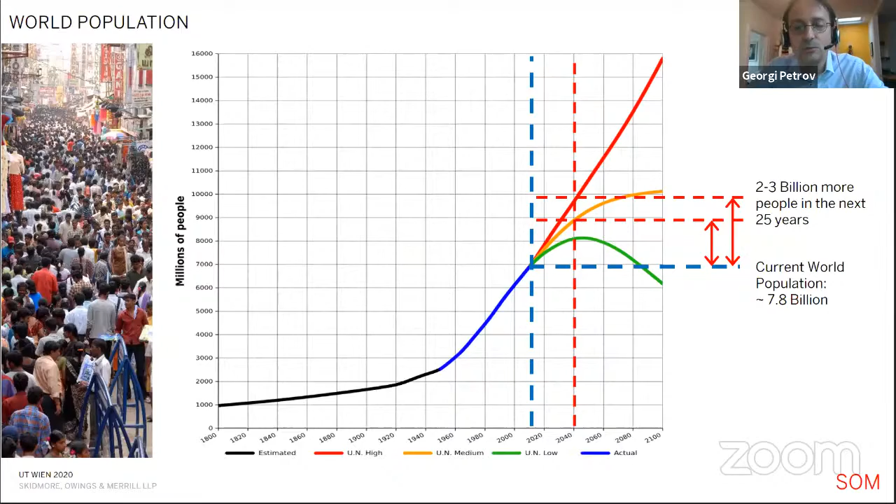And the trend is that a lot of us are living in cities. We passed quite a while ago the point where 50% of the population of the Earth lives in cities. And in the next 25 years, the estimates are that almost 3/4 of us will live in cities. And at SOM, we approach this challenge through the combination of architecture and engineering.

Even at the very beginning, our firm was founded in 1936. These are the three dudes, Skidmore, Owings, and Merrill. They're all dead now, but Merrill was a structural engineer. So this collaboration between architects and engineers is in the very essence of our practice.

And even to this day, we always go out together and design as architects and engineers together. It's not like our architects doodle something goofy and then give it to the engineers and say figure it out. Especially on challenging projects like tall buildings, we always come up with ideas together at the very beginning.

We have a number of offices. The major ones are in New York, Chicago, and San Francisco, but we have a pretty big office in London as well, and then several other cities around the world. And we do a lot of various projects, commercial renovations, but we're mostly known for our super tall towers.

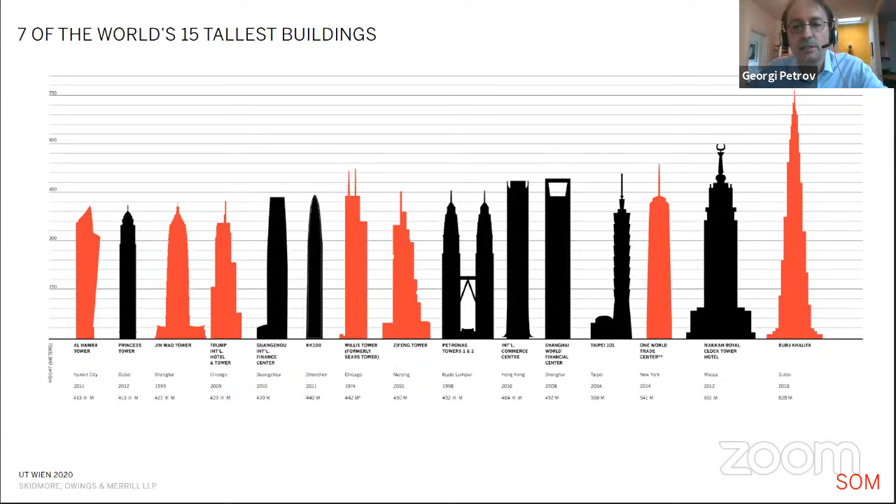And we have done the very first example of each one of them. So not only do we design tall buildings, but we design very innovative and pioneering tall buildings. And I'll show almost all of these to you throughout the lecture.

And the other theme that repeats through all the projects is this multidisciplinary approach, but it evolves through technology. And we're not married to any one type of design tool, and we keep looking through the newest. And we've been pioneers also in digital design, going all the way back to the 60s.

In the 80s, in fact, partnering with IBM, we developed the first sort of BIM software. Unfortunately, it was Unix based, so it didn't quite survive. It got beaten by AutoCAD in the early 90s. But as new tools come up, we always adapt and change the uses.

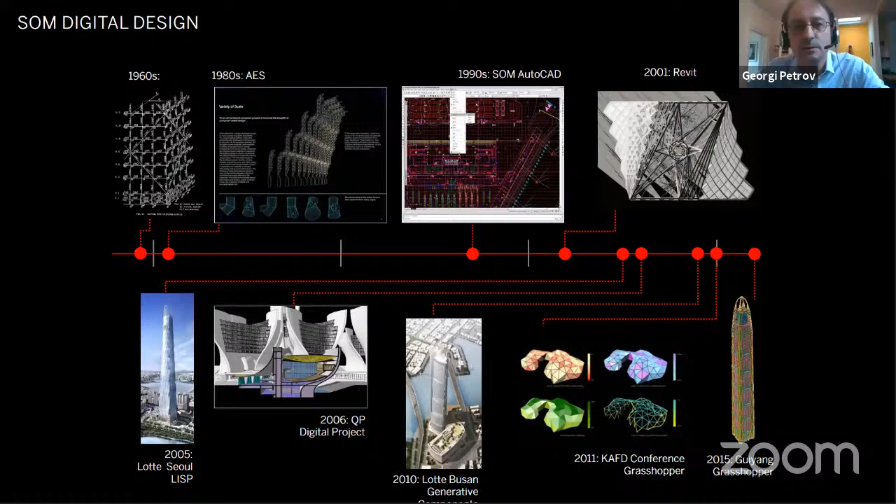The last decade has been largely dominated by Grasshopper and Rhino as the main tool where we come up with ideas and model geometry. And very often we find that the commercial tool doesn't exist, so we also write a lot of our own code. So these are a lot of these internal form finding and parametric modeling tools that we have.

And the type of thought process is always that you start with some kind of blank slate, a domain where you want to create geometry. And first we come up with what is the correct topology, how things are connected, both architecturally and structurally. Then we optimize the shape, and only at the end do we size the individual members.

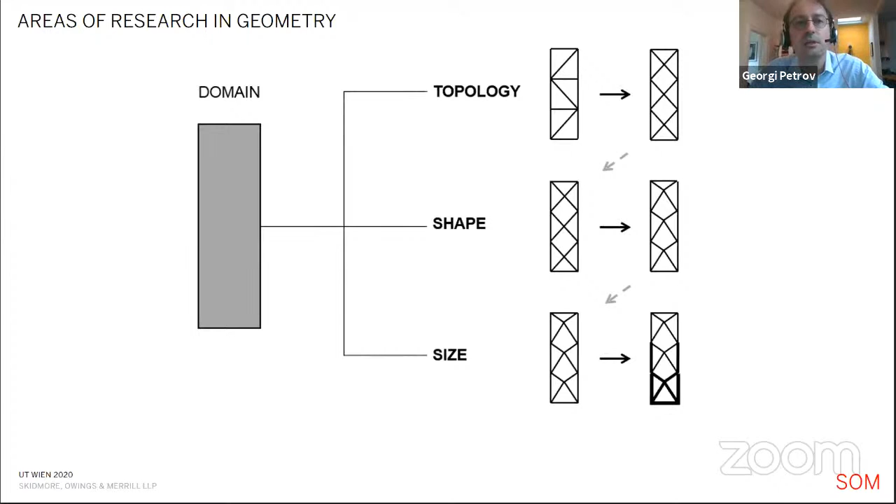So instead of just drawing some random blob that Rhino allows you to do, and then trying to shove some structure on it, our process is more thorough and more step-by-step, making sure that we have the correct geometry first before trying to make it work, both architecturally and structurally.

And then, of course, when you build tall buildings, you need to work with a developer, and they are looking for very specific things. There's a lot of competition for office buildings and for residential buildings. They're looking for the tallest, the grandest, the best spatial experience. Everybody wants big column-free interiors. And in today's world, everybody wants it built immediately. So these are the pressures from the developer and from the constructor side.

And then in the last 20 years, computer technology and digital design have allowed us to draw any sort of shape. And very often the question is, what is the correct shape? Just because you can draw something goofy and blobby on the screen, is that really what you should build? Is that the correct shape? And is that the best thing for the project and for the planet?

And so in engineering super talls, this is a little analogy. I don't know if you've heard of this Hambly's paradox. Basically, if you have 2 stools, one with 3 legs and one with 4 legs, which is more structurally efficient, which will have less material? And how do you design the legs?

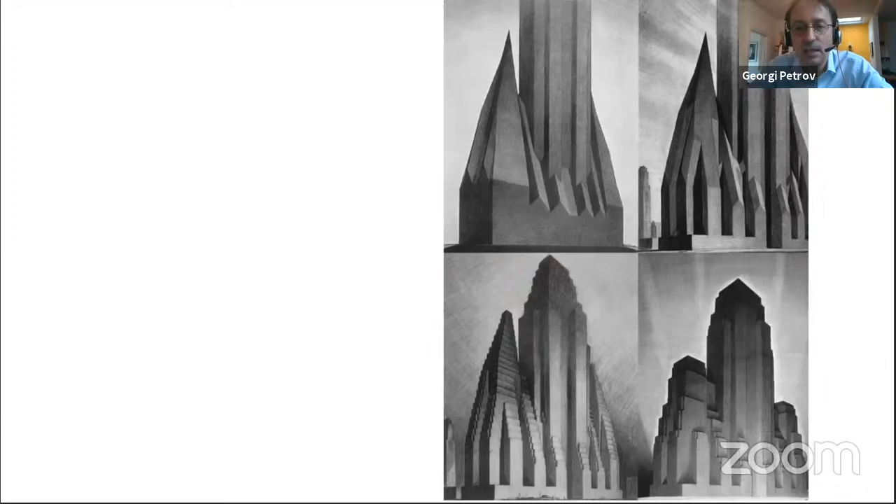The next big influence is this building by Mies van der Rohe, the Seagram Building. What they did with the company is they decided to just take the 25% and build straight up, and leave the rest of the lot unbuilt. So this is a private plaza in front that's open to the street, and the city really liked that. And so they changed the rules to actually encourage people to build this. So if somebody wanted to build another building and leave a plaza like this, they would be able to build a bigger building on this lot.

And so in the 60s and 70s, New York started getting a lot of these boxy glass towers, like the original Trade Center and so on. And that's, again, a reflection of the zoning. And nowadays there's almost no land left to build. And so we're starting to get these really thin towers, especially down south of Central Park.

That is, again, a change in the rules of how much you could buy the air rights of your neighbors and build these really skinny, super tall towers. The other effect on tall buildings is program. What is the building made out of?

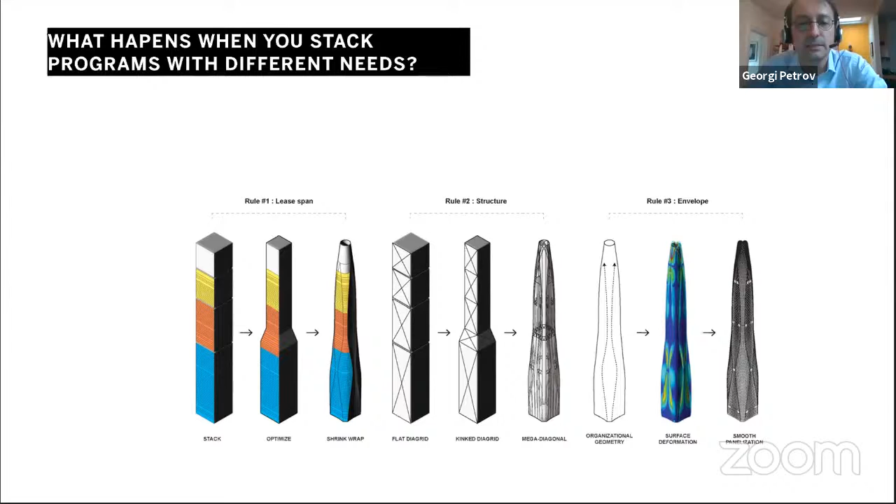Another one is conveying. You got to get the people up and down the building and all the water and all the mechanical systems. And here, up to 40 stories, everything is quite conventional. When you get taller and taller, above 60 stories, you really have to rethink all of these systems, the elevatoring, the water supply and the air supply.

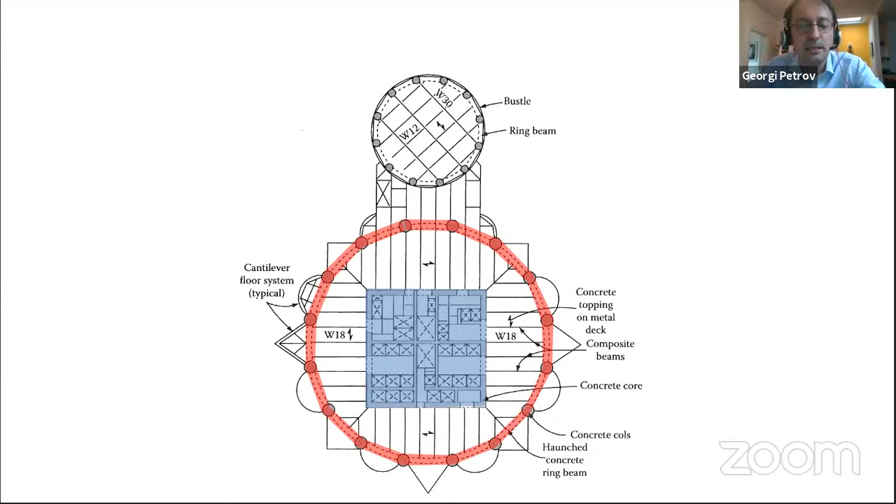And so in a super tall building, this core in the middle becomes a big 3D puzzle. It's pretty challenging; that's one of the biggest challenges in designing tall buildings. So you have to put all these things in with sometimes competing pressures. So all the structure goes in, and then usually it's a big puzzle to get the elevators right. They drive a lot of the design of a tall building.

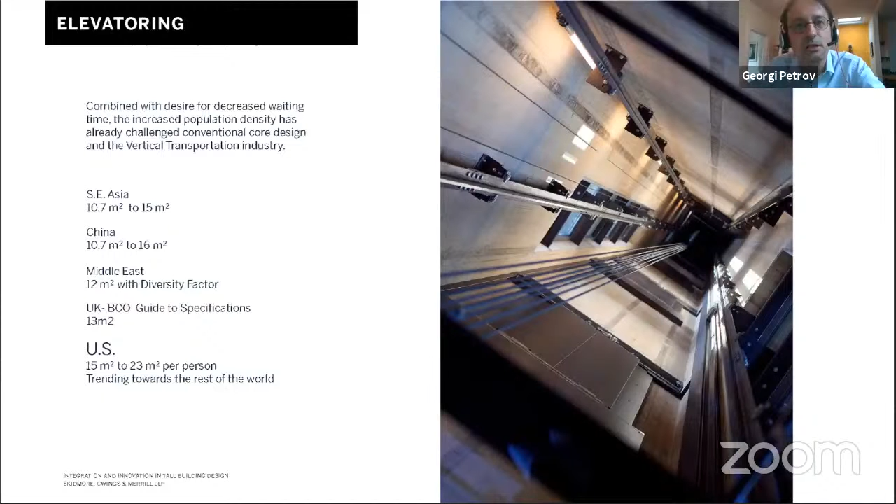And in a very tall building, you usually have different zones. So when you come in, you usually have sort of an express elevator to a sky lobby, and then you switch to sort of locals. And the cool thing of this is that you could stack the local elevators on top of each other in the same vertical space. You have to have a few stories in between for the pits and the machine rooms, but that saves a lot of space.

And so you can think of a very tall building as sort of a neighborhood. You have the subway, the tram gets you to your local stop, and then you have to kind of walk or bike the rest of it to your destination. And then usually there's some firemen's lifts, and typically people put like restaurants and observation decks at the top. So there's some express ones.

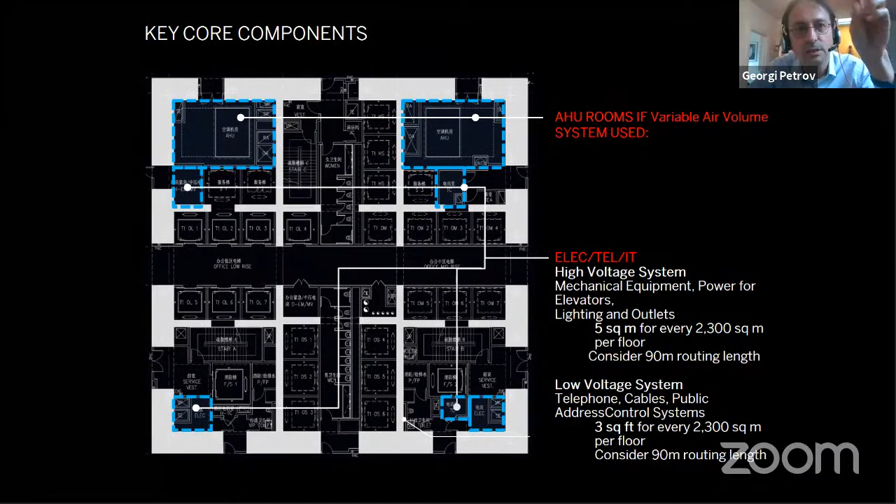And so in a typical one, you'd have the express, the shuttle elevators, and then you would have the locals. And then usually on every floor, you need some air handling units, depending on the type of systems you use. You usually need some electrical and IT closets, and they all have requirements of how far apart they have to be and where their shafts are. There's usually some plumbing rooms and plumbing chases.

And then depending on the code and which country you're in, you have 2 to 3 emergency fire stairs, and usually 1 or 2 fire lifts that only the firemen use in an emergency. And so in each floor, all this stuff needs to make it out of the core. So if you ever work as an architect or a structural engineer on a tall building, it's really a big challenge trying to work this in 3 dimensions.

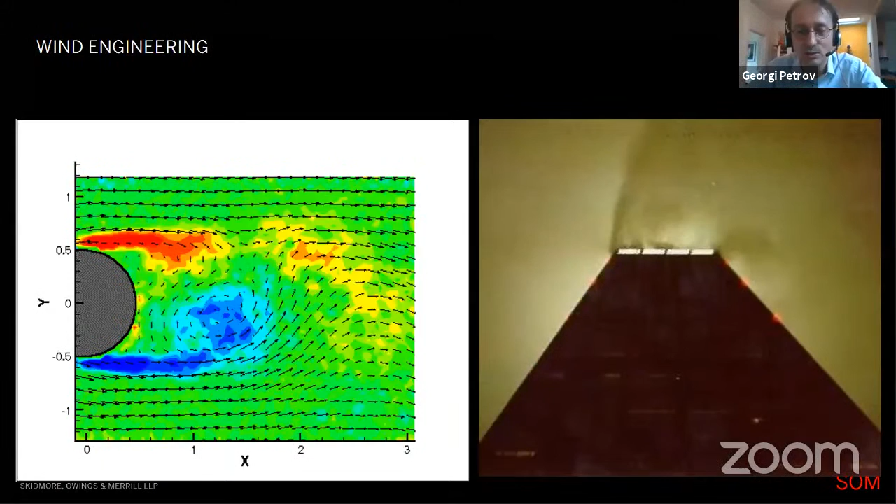When wind or water goes past the stationary object, it starts to flow on either side of it in alternating eddies. So we call this vortex shedding. It sheds these vortices on either side of it. And it actually happens. This is the John Hancock with the cloud going behind it. And so the interesting thing is that as these vortices happen, they start shaking the building in a rhythm.

And if the rhythm in which these vortices shed matches the fundamental vibration period of the building, then you have big trouble, just like a kid on a swing, right? You give a little push at the right time, and then you could really amplify it. And the thing is that a very tall building, as these vortices shed on either side of it, the building actually shakes perpendicular to the wind. So as the wind is blowing, the building is actually shaking the other direction, and these vortices are shedding.

So, the worst thing you can have is a straight building. Can you see the animation here? Is it showing? Because it doesn't usually work very well on Zoom. But anyway, if you just have a straight building up and down, this is a little desktop wind tunnel that one of my colleagues built in their house to demonstrate this.

But anything you can do along the height of the building, so that at different heights the vortices shed in a different period, actually helps a lot. We call it confusing the wind. You don't want to give the wind a chance to get organized and these vortices to shed the whole length of your building. So if you add some notches, that helps a lot.

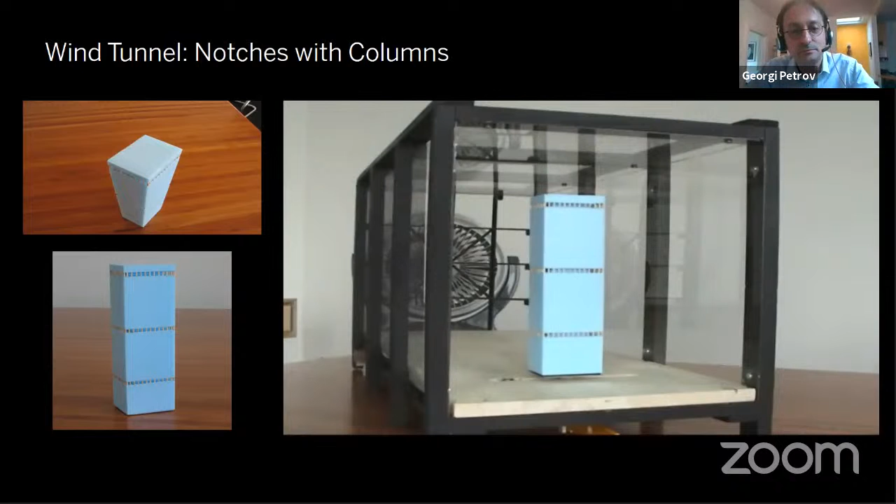You can also chamfer the corners. That helps a little bit less. You can do square cut the corners. And the one thing that helps a lot is actually shaping the building. So giving a taper or some kind of a lean to the building helps tremendously. Oops, did this crash? No, okay, anyway. You should be seeing all of them shaking, but I'm not sure it's working. Oh, no, this one. So here's all of them compared.

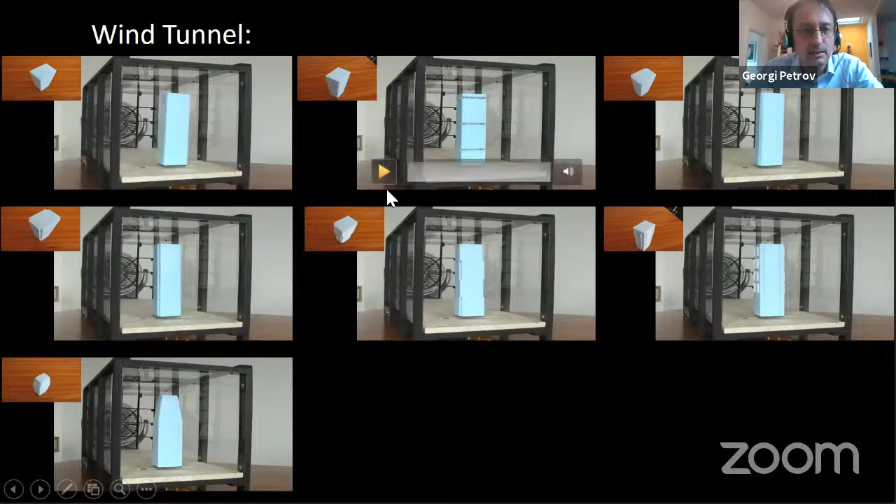Anyway, so the main force in a tall building is actually wind. The gravity doesn't really control very much other than typical floors. And you can think of a tall building as sort of a cantilever beam. So you have a typical cantilever beam that you have a force on. A tall building is basically everything rotated 90 degrees. So it's a really tall cantilever sticking out of the ground.

And in almost all places in the world, the wind forces are more important than the seismic forces. There's very few places, like Mexico City and Indonesia and sometimes Tokyo, where seismic forces govern. But you can really think of a tall building as governed by wind. Definitely almost anywhere in Europe, wind would be the governing force on it.

And so if you think of a tall building as a cantilever sticking out of the ground, you can just think of it as a big beam, right? We have a beam, we have flanges and a web, and the flanges are the ones that support the bending, and the web is what supports the shear. And so your goal is to put the material to support your tall building as far away from the center, just like you would do on a beam.

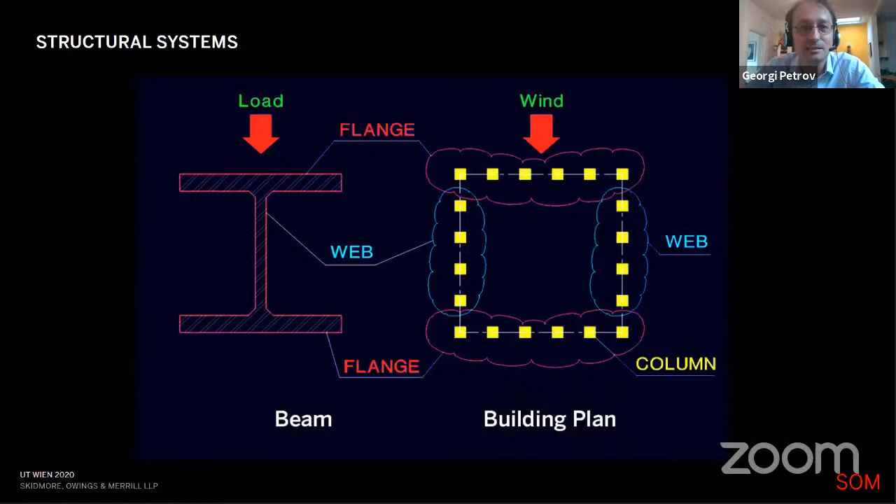Or think of it another way. If you're just standing straight with your feet together and somebody pushes you, right? First thing you want to do is spread your feet apart to get a wider stance. So it's the same thing for a tall building.

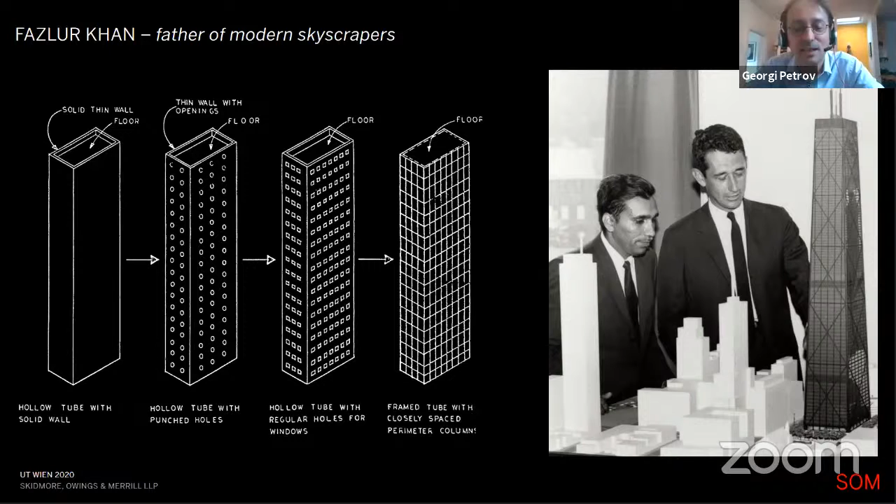So if you think of a tall building as a beam sticking out of the ground, you really want to put all the materials on the perimeter, basically make a big hollow tube. Obviously, that's not a very good building. It's a chimney. So the question is, how do you shape the facade to make it nice and put all of the structural material to the perimeter?

He was actually on the Google Doodle a couple of years ago for his birthday. So we made it there.

But here are three of the very earliest skyscrapers. If you noticed, all of the buildings around them when they were constructed are these 20s and 30s Gothic-looking skyscrapers. And here, everything that you see on the facade is a structural element. So every vertical is a column and every horizontal is a beam. So this is this idea of putting all of the structural stuff on the perimeter.

And then if you look at the floor plans, this is a residential building and the other two are offices. There are no columns in the middle. There's still some gravity columns holding the elevators and stuff like that. But really all of the lateral system, all of the material resisting the wind loads, is on the perimeter. And that really frees the plan on the inside to be free of columns.

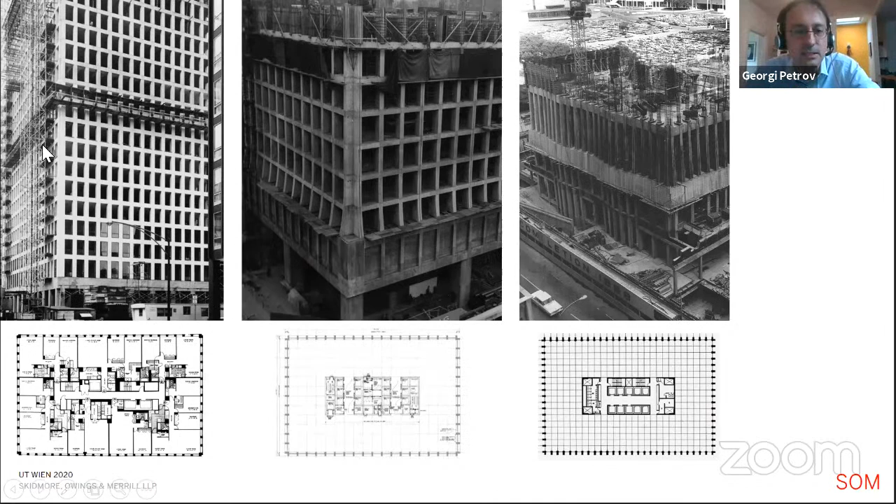So this is something that's very common these days. That's what you would expect, but these are the first buildings to be able to be really tall and do this. And again, what you see on the facade, the structure is the architecture. And this sort of culminated in the John Hancock Center in Chicago. And disclaimer, this is my favorite SOM building.

Here, instead of putting all of the columns closely spaced like this, if you do the big X's, you could have the columns spaced far apart. And this kind of combines all of these themes that I've introduced to you together for the first time. So the developer came with this idea to do two buildings. One is an office building that's kind of wide, to make the office work, and then a residential building that's kind of narrow, taking up a big chunk of the ground.

And so what SOM proposed is, why don't we take the two and stack them on top of each other. The building can taper in so that the office at the bottom has the wider lease span. And actually at the very bottom, it has parking, and cars don't give a damn how far they are from a window. So the widest part is actually parking, then the office, and then the residential on top, and then there's an observation deck and a bar at the top.

So if you ever go to Chicago and you want to go to the top of the building, there is the observation deck where you pay for tourists. Or you could go to the bar, that's one story above it, get a drink and get the same view. So just some travel tips for you guys if you ever visit Chicago.

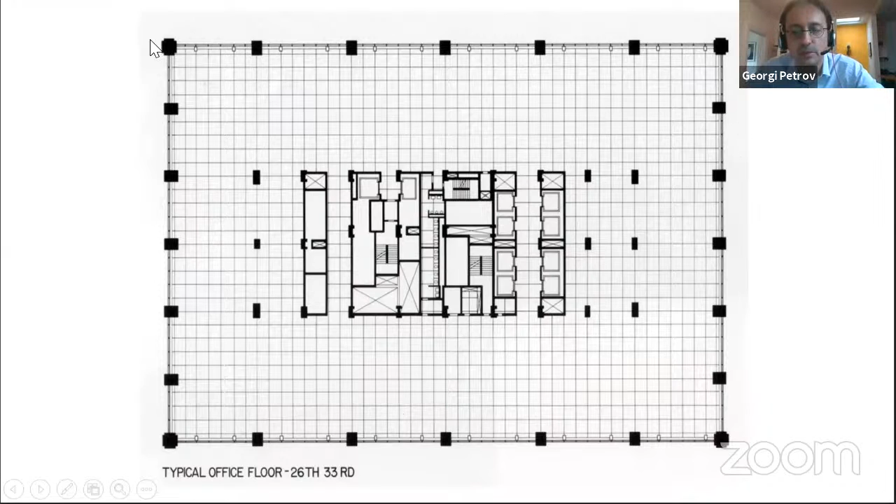Anyway, so this is the ultimate sort of marriage of the structure and the architecture. All of the lateral system is the perimeter. This is how it looks in plan. So the taper is over one of the modules. The rest of the columns are straight. And then this is the floor plan. The columns here in the middle are just to hold the floor to reduce the span, and all of the lateral system is on the perimeter. And then there's a pool and residential parts. This is it going up.

And another key thing, again a theme that repeats a lot, is what you do at the connections. So we can come up with all these optimized geometries to reduce the size of the elements. But in order to gain all of the savings and all of the economy, you have to really think about how things fit together. And very often it's the connections that really govern a lot of the sizing, so we think a lot about how things fit together. For example, here, the diagonals are actually rotated 90 degrees from what you would expect in order to make the connection as small as possible and to gather these savings.

And when we first proposed this as a very efficient structural system, there was a big sort of trepidation or uncertainty about the diagonals, like who would want an apartment with the diagonal going through it. And in fact, if you look these days, the apartments with the diagonal sell for more than the apartments without it. So it was really embraced by everybody, and it's a big success.

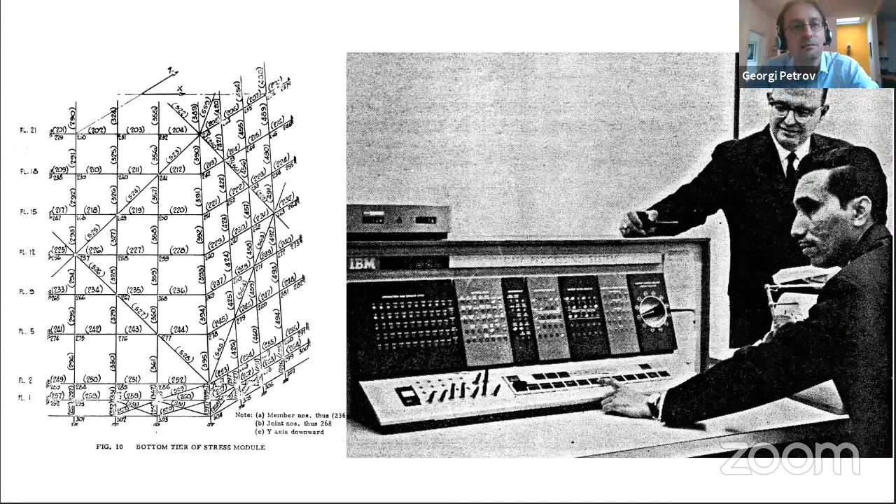Another thing is this is the first building that was analyzed by computer. Here's Fazlur Khan with the IBM computer in the 1960s. There weren't any computers in the office, so they did a partnership with the University of Chicago to use their computer. And the computing power was so small that they couldn't model the whole building, so they had to model only a quarter of it and use the end conditions to simulate the full behavior of the full building. So we've kind of been trying to introduce computational design from the very, very beginning. And here is the building as it stands today.

Another next step was in the 90s, and this is another really important building, the Jin Mao. It's the first super tall building outside of the United States. Besides the John Hancock, it's the first mixed-use tall building. And it really changed a lot of the building codes in China; in this giant construction boom in China, a lot of the codes and the construction methods were first developed on this tower. This is, again, a mixed use. It's got an office and a hotel on top of it, with an observation deck at the very top.

And here, again, it's a new theme on this idea. Instead of having a bunch of close columns on the perimeter, they put all of the lateral system in these 8 mega columns, so bunched it all together. Again, they're as far away as possible in order to make the building as stable as possible. And then there's the core on the inside. And on each corner, there's 2 small gravity columns that are just picking up the corner. They're not part of resisting the wind loads.

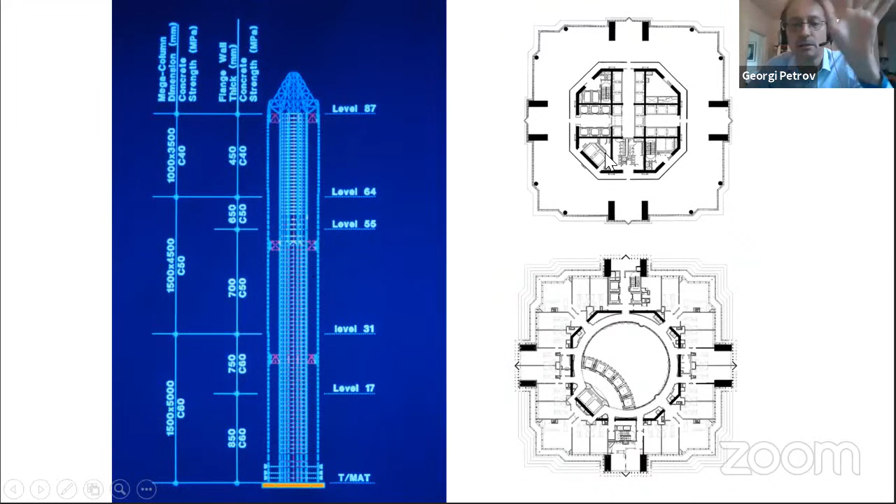And the cool thing is that as you go up at the top, you no longer need all the office elevators and a lot of the other stuff, so they actually hollowed out the middle for a pretty grand lobby inside. And when I was a student a long time ago, I got to visit it. So this is me hugging one of these mega columns. You can see the size of it down at the ground level in the lobby.

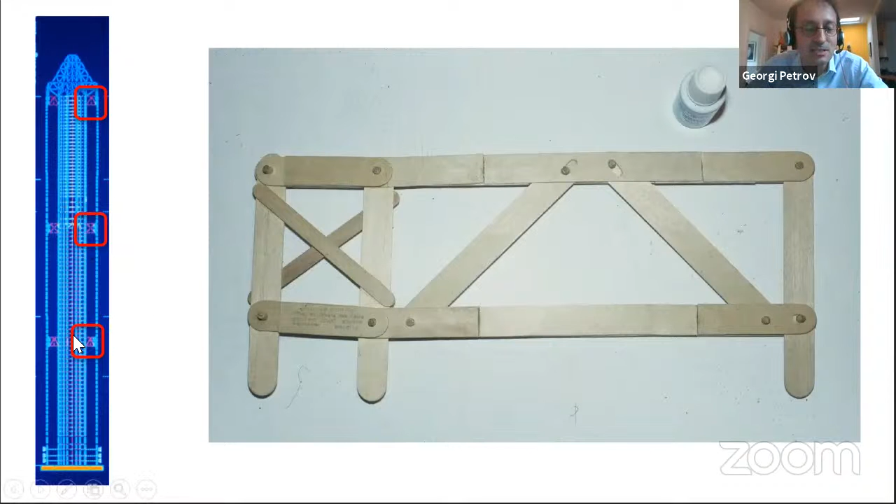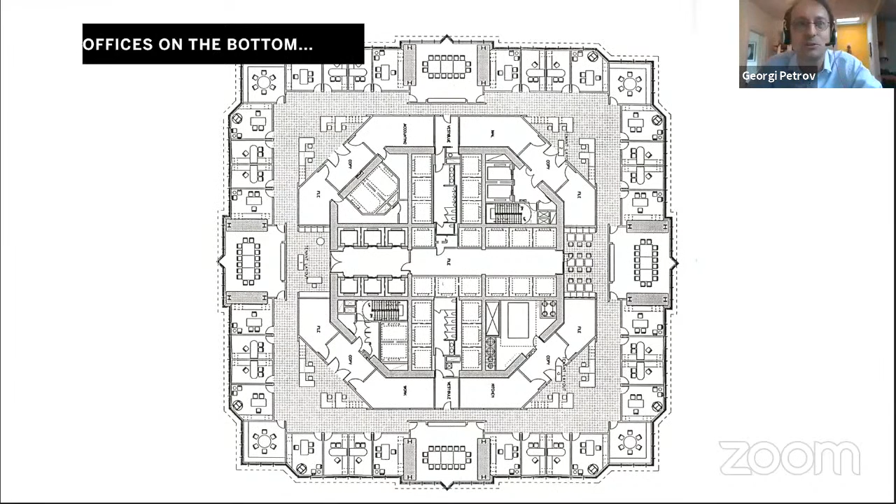I should ask, do you want to ask questions throughout or at the end, or I can keep talking? I'll keep talking.

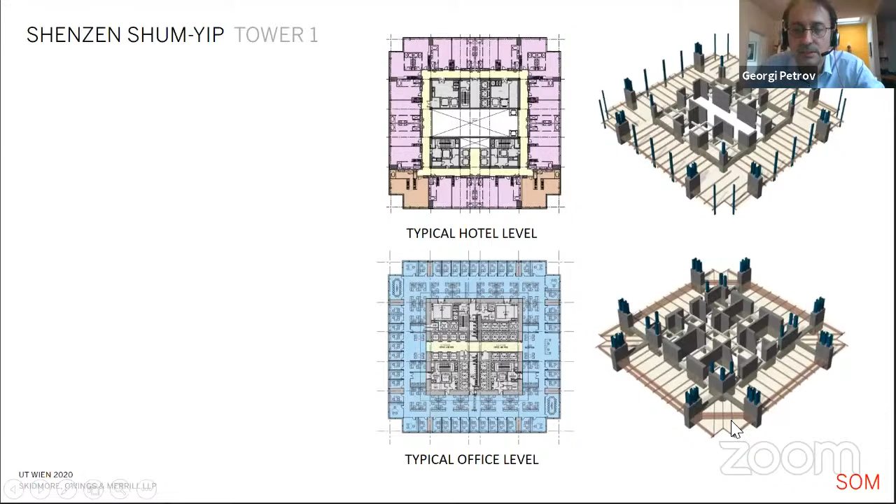And here, just like Jin Mao, we have 2 mega columns on each side and a big core, except that we wanted to have no other structural columns, to get rid of these corner ones, because there's a lot of good views around. So we wanted to minimize it to only the 2 mega columns. In a typical office building, you have a corridor if you have more than one tenant on a floor, and that makes the span between the facade and the core wall bigger. So we wanted to reduce this in order to reduce the load on the perimeter, minimize the structure and not have gravity columns. So we actually ran the common corridor through the core. That way you could have one tenant or 2 tenants or 4 tenants all on the same floor, so the client has flexibility in the future.

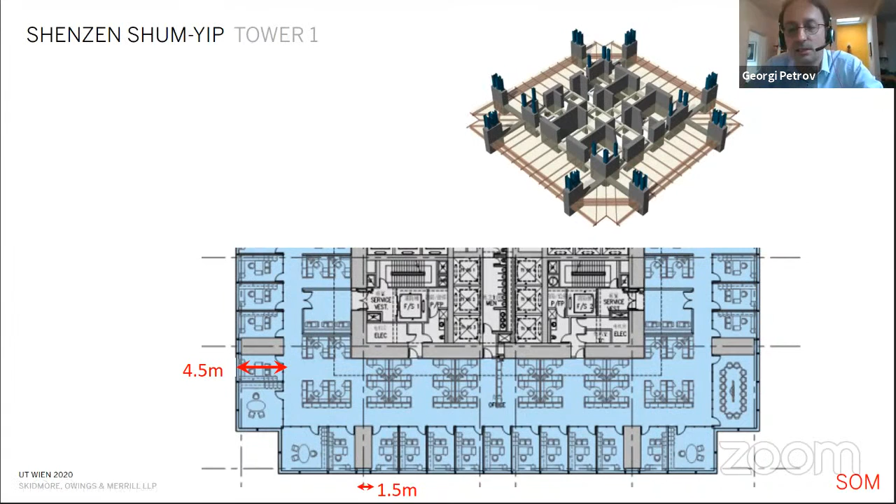And we actually sized the mega columns to be the depth of a typical office in China. In China, they do a lot of enclosed offices. In Europe and North America, we usually have more open office conditions. The typical facade mullion is 1.5 meters, so we made the column 1.5 meters. And the typical planning for an office is around 4.5 meters. The interior layouts usually work in 1.5 meter modules. So if you do fill out a floor with offices, as you're walking down this corridor, the columns will completely disappear. They'll be just in the wall of the offices. But if you do want to have an open space, then we want it to be as clear as possible.

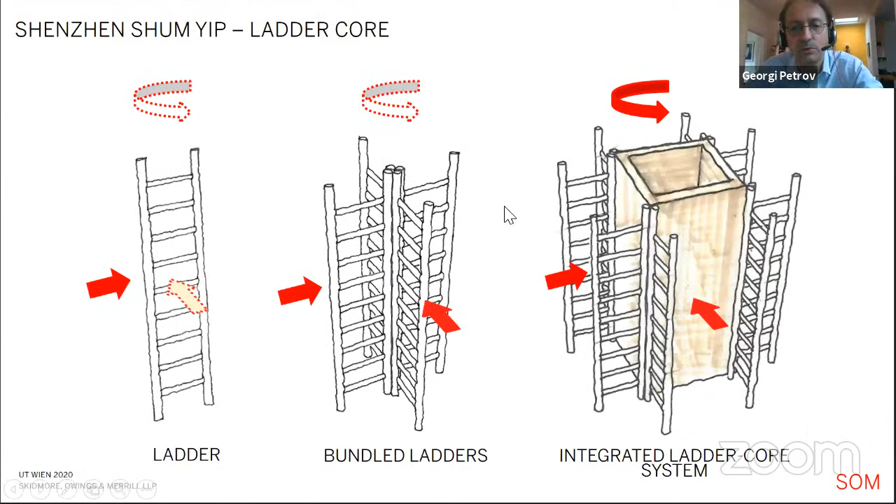And to emphasize this, for this building, we took the typical window facade module of 1.5 meters and doubled it. So we have extra wide facade modules, again, to maximize the views out. So this is the goal that we had architecturally. And the structural system we came up with is called a ladder core. If you take one ladder, it's soft in one direction and easy to twist, but really rigid in the other. If you put 4 ladders together, they're still soft to twist, but they're really rigid in 2 directions. And if you combine them with a tube core, then you have a pretty robust system that's rigid in all ways, in both translation and in torsion. So this is our structural system. Instead of having big outriggers and belt trusses, we have the core and the mega columns, and they're connected on every level.

There's still some belt trusses along the perimeter. And in order to get rid of the other gravity columns, we decided to put the columns in, lined up with the core, and then cantilever out the side. So this is what we call a balanced cantilever. The cantilever on either side helps keep the forces in the big central span free. So every floor has, I think, 26 meters from face to face that are completely clear of columns. So it's a pretty impressive span. This also helps control the gravity loads, so there's no uplift. The building is not trying to pull out of the ground.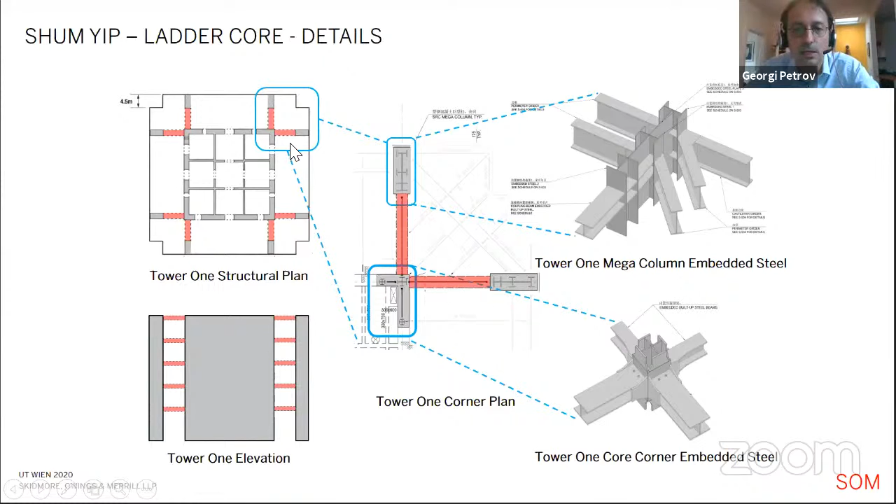And then structurally, the biggest challenge is these link beams, basically the steps in the ladder in the analogy, that connect the mega columns to the core. And so there's a lot of steel embedded in it. And this is because this is a brand new system that's never been done.

We modeled everything in 3D and actually built a finite element model where we modeled the steel, the rebar, and the concrete, and applied forces, and then made sure it performed well in each of the different earthquake and wind situations for the Chinese code. And so this is the structural system. There's the core, steel, mega columns. This is what the steel looks like inside the mega columns down at ground level.

I do have a question. Yep. So I understand that you have the freedom to use this 26 meters without a column. Yep. But do you also have an advantage to build higher? That's one question, and another one is, how's the comparison? How much material do you use in comparison to the earlier method? Ooh, that is a really good question.

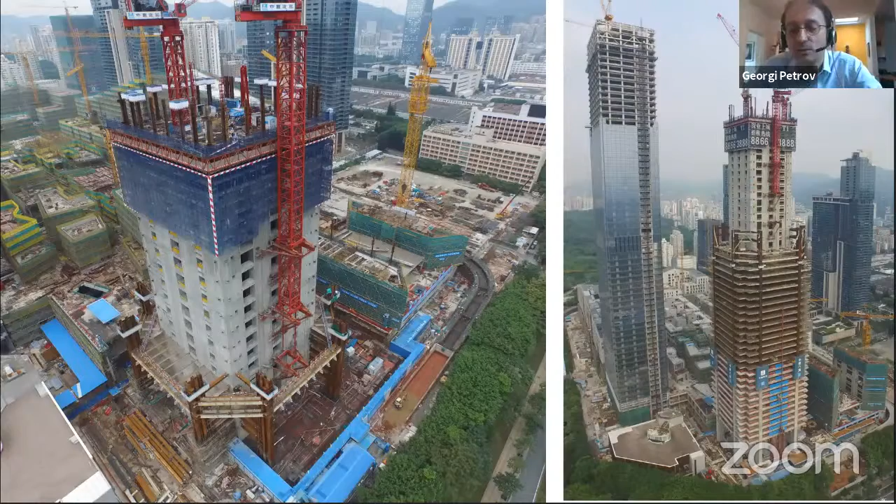So the first one is, if you notice, there's actually a double beam. So there's two of them in order to keep the depth as small as possible. And they are deeper than the small gravity beams that span to each floor. Actually, I think I have a picture. Oh, there you go. It's the very next slide. So this is it under construction.

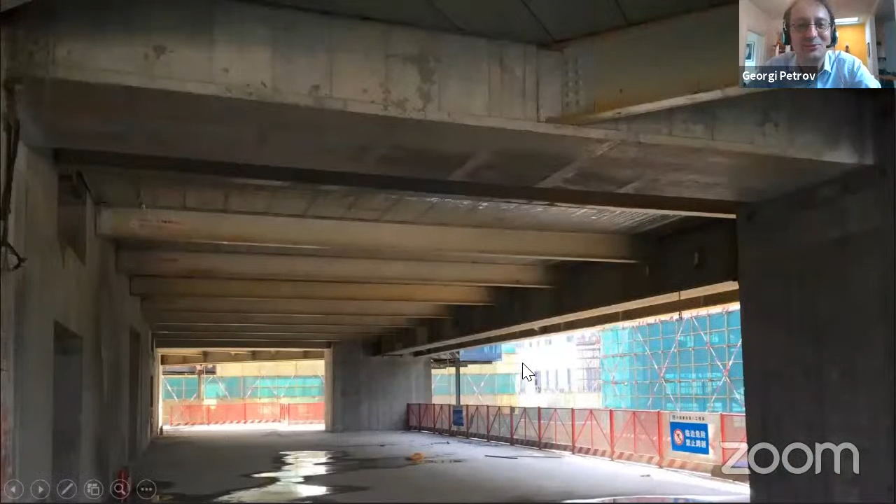So we keep the small gravity beams that just span from here to here as small as possible. And then the big beams that span all the way across, they're actually part of the lateral system too. And it's a little bit of a peculiarity of the Chinese construction code why they're so deep. They actually don't need to be so deep if this was built in Europe or the US. But anyway,

all of the mechanical systems are in this raised-up zone. You can see the holes coming out. And so the goal is to maximize the floor-to-floor height. Is that what you're asking, right? So that's how we achieve that.

I don't have the exact numbers for this building, but that is an important thing that we tracked, the relative savings in materials. And so this one, I don't know if it's more efficient than the Jin Mao, but that's partly because the code has changed a little bit. But having this idea of the balanced cantilever, it reduces the size and the material in these buildings. So it's managing where the load goes in order to make sure we minimize all of the material use.

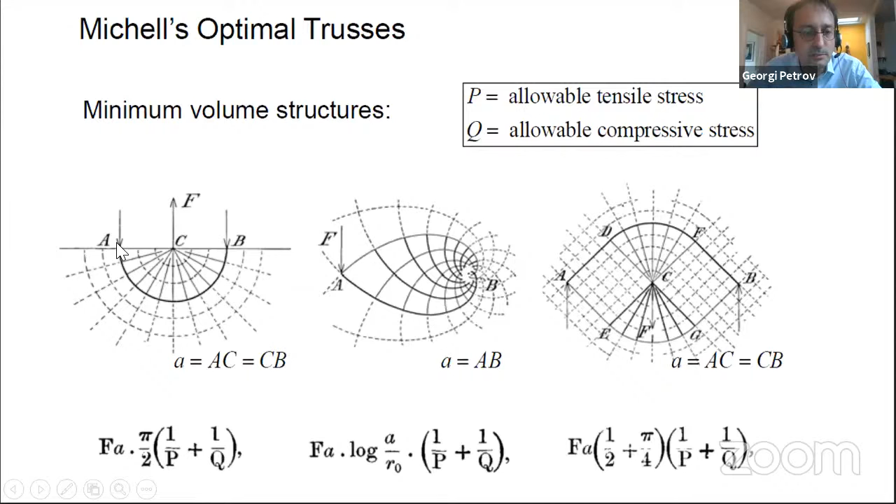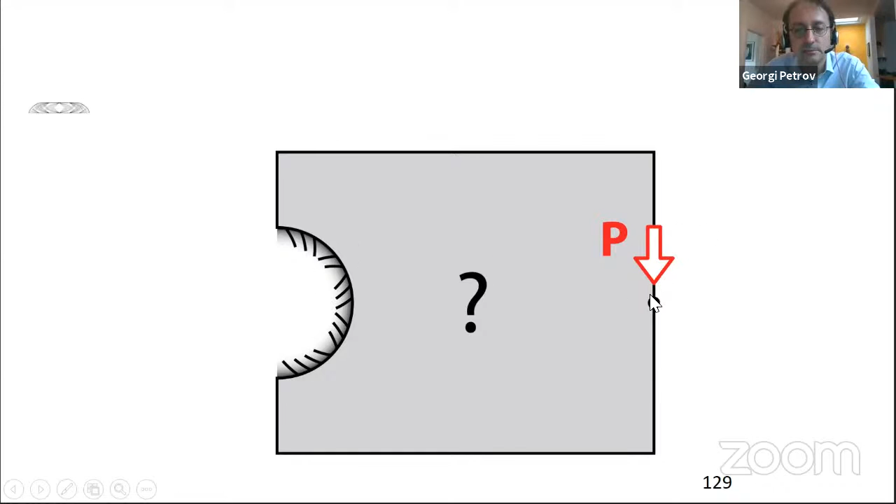This is basically for a bridge, a beam that's supported on two sides with a force in the middle. And using our tools, different form finding tools, we've actually been finding this to be true in many different ways. So if you start with a design space, so you have a support here, and you just kind of do this random rectangle, and you put a load here, and you ask the program, how would the load get from the point it's applied to the support?

And this is one of our tools. This one basically draws a bunch of elements and then runs iterations, and the ones that are not used get removed, and the ones that are used more get reinforced. And this shape emerges as the most efficient shape. This is another tool with a different mathematics behind it, and again, it converges to the same type of shape.

And so we've been intrigued by this for 15 years or so around the office. This all started by, not part of any project, just people being curious, exploring. And so if you try to take this and apply it to a tall building, and it's kind of fixed at the ground, and you have a wind load on the side, if you run it again with several different, you get these patterns that emerge, and it kind of makes sense, right? That the top of the building wants to be more horizontal, where it's more shear. Towards the bottom of the building, it's more bending, so you want things to be more vertical.

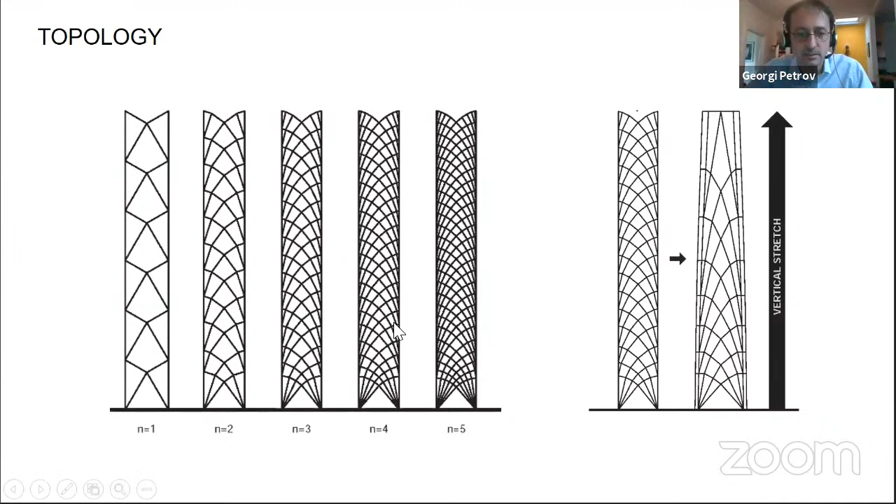Well, that's not cool. Sorry about that. Okay, let me restart this. I think one of the animations broke out.

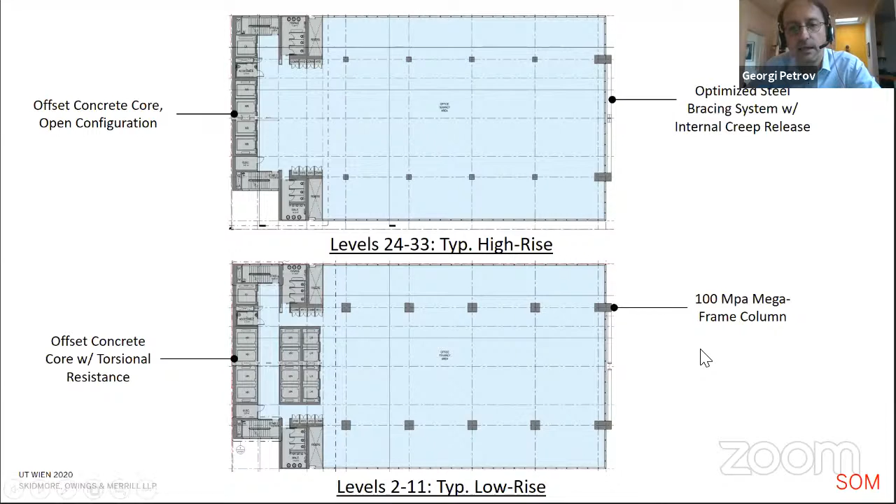So this is the typical floor plan. It's pretty short, so the core is actually put on one side, and the brace is bracing the other side to balance the rigidity of the core on the open side. And we're using the same idea here of the balanced cantilever. So if you take a beam and you support it, the cantilevers on either side of it actually help reduce the forces in the middle.

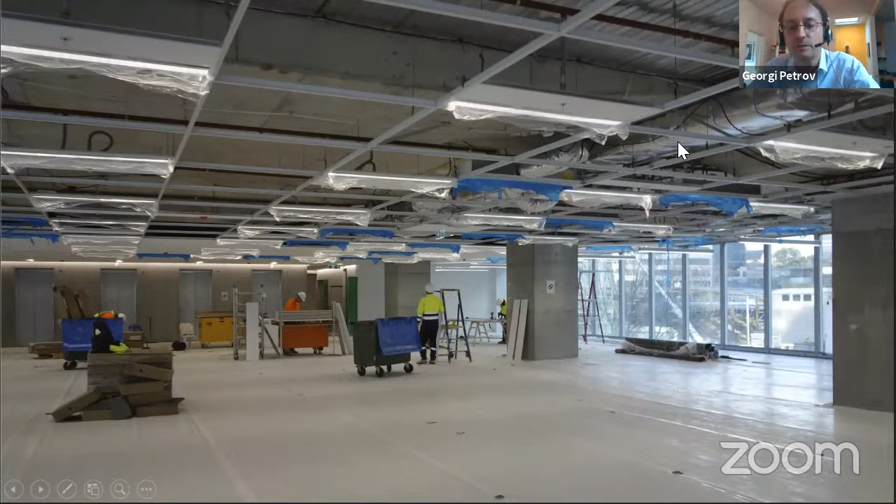And in these pockets, which is material that you don't need for structure, so you're taking it out, you're saving the concrete, and you could use the pocket to run your ducts through it, and then reduce the sandwich of the structure. And then because of the cantilever, again, the perimeter has no columns, so the view out to downtown is column free on the upper levels.

And then this is the high-waisted brace with the more optimal geometry for the lateral support, rather than doing the straight through and through X. And again, the same theme. We can get this more optimal geometry, but really to get the savings and the constructability, we have to really pay attention to how the elements are connected on site.

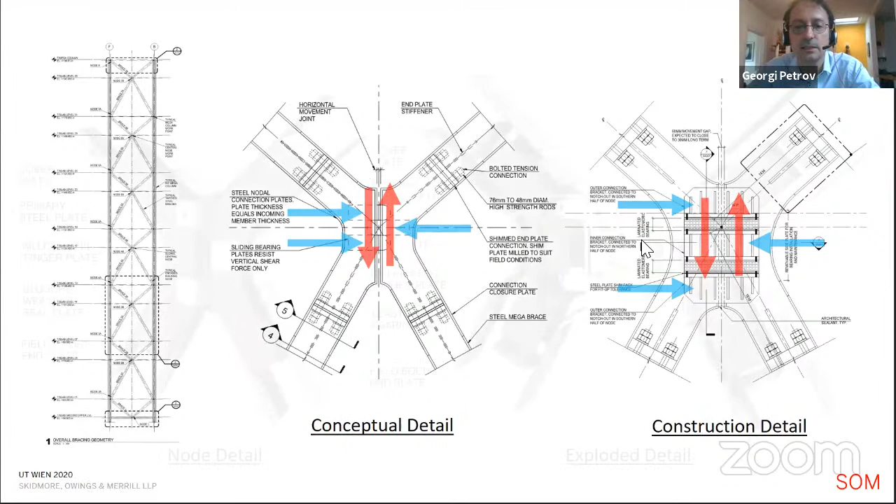So this is a steel brace going to a concrete column, so how it goes into the column, and then how the forces in the brace resolve and pass through each other. So we had several different ideas of whether you connect them vertically or horizontally. And everything we work out in 3D before we actually get it built. So here are the embedded things in the concrete, and the braces coming in with the node connection in the final building. So this is again a brand new version of the brace frame.

I'd have to talk about Burj Khalifa too. It's currently the world's tallest building, and this is a building that couldn't be built almost anywhere else. It's again a brand new structural system that's never been done before. I don't think this one would be as repeated as the Jin Mao and the John Hancock, because it's pretty specific.

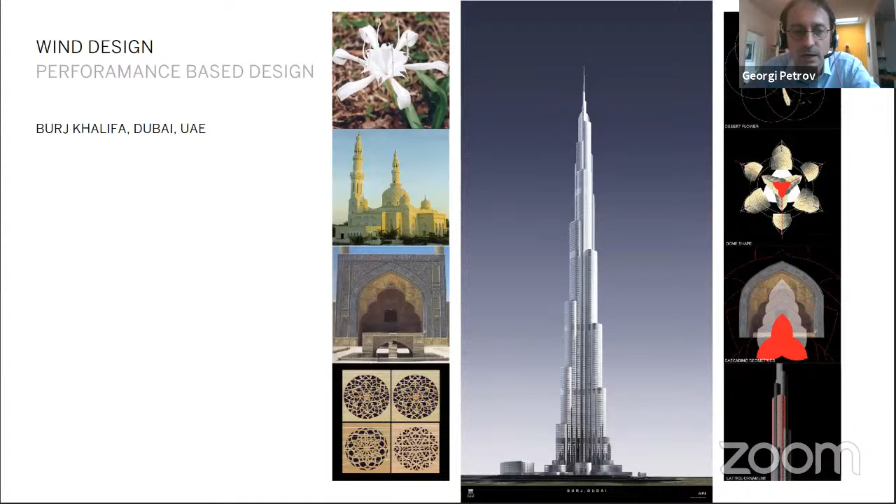The plan of it is inspired by both local flowers and traditional geometries. But it's really also governed by the planning as well. So this is almost entirely a residential building. It's got a hotel at the bottom. Most of it is apartments. Near the top it has something they're calling boutique offices, which are basically these really tiny offices, which I don't think would fly anywhere else in the world.

But the three-way shape is governed by the program and by the structure working together. So from a program point of view, when you're selling high-end residential and hotel elements, you want views and access to sunlight, but you also don't want to be looking into your neighbors. If you've all studied the Plan Voisin by Corbusier, these cruciform tall towers: when you have four legs at a right angle, you're basically looking into your neighbor's apartment, which is not as desirable. So if you have three at this angle, you're really not seeing into your neighbor's apartments.

And structurally, it works very well. Again, the three-legged stool is more statically determinate and more efficient than a four-legged structure. So in order to make this work, there's a central core that's a hexagon this time, that has all the elevators and mechanical shafts. And then going out, every wall is literally a structural wall. So we call this a buttressed core. It's like a dome with flying buttresses buttressing the dome. And we call it the buttressed core.

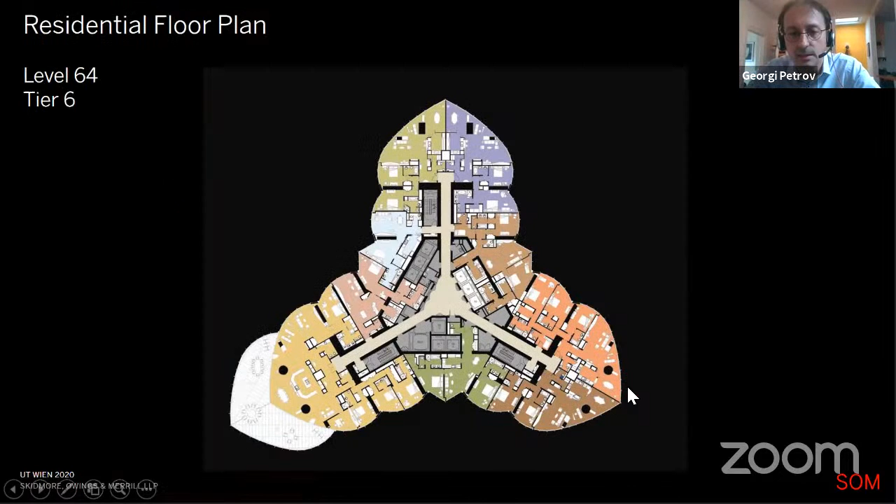Every vertical wall that you see here is a structural wall that's buttressing or bracing the central core. And you can see it in the architectural plan, right? In between each of the rooms, there are these thick walls, and it works perfectly fine for a residential building. Also, as the petals step in, the last petal, which is open, has the columns. So the columns from one level line up with the walls below, so there are no transfers. Everything lines up vertically through and through.

And this is going back a little bit to the fact that these buildings are governed by wind. The geometry of this building was really shaped by the wind engineering, and in most cases for super tall buildings, it's not really the strength of the building that governs; it's the serviceability. It means the habitability, the comfort inside. So it's how much the building can deflect, and then how much you feel it inside. And there are different criteria for office or residential.

For example, in an office building, while you're sitting at a desk and looking at a monitor, it takes a lot more acceleration to make you notice it. But if you're lying in bed or eating at home, it takes a lot less acceleration. So a residential building has a lot more strict criteria for how much it could deflect and how much it could shake and accelerate in the wind.

And so, sorry about that. I redid these slides at the last minute.

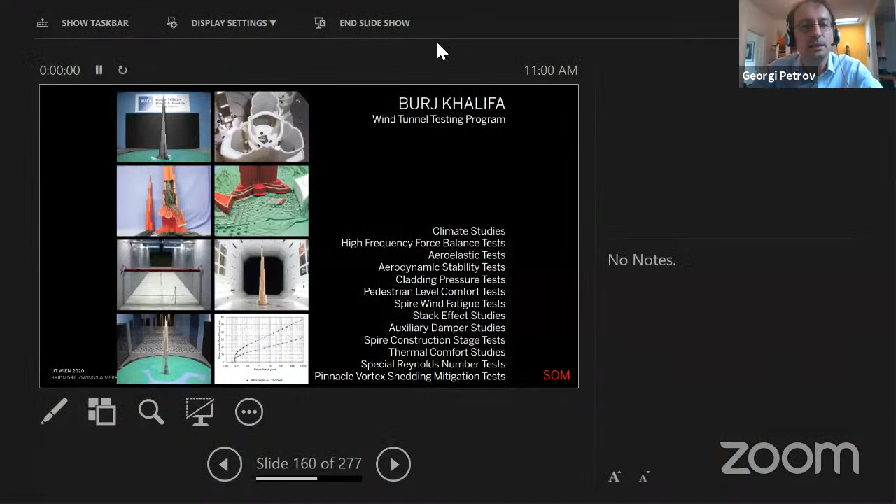On Burj Khalifa, we did a very detailed and sophisticated wind engineering effort, in coordination with the structure and the architecture. So the exact sequence of the steps and the exact layout of the building was all governed by the wind engineering. And these are all the different studies that were done on it.

I won't get into it too much, but there are two different types of wind tunnel tests you could do. Almost all buildings are designed using this, which is called a force balance, which costs $20,000 to $30,000 to run. A more sophisticated one costs $100,000 to $200,000 just for the wind tunnel test, and this is what was done on Burj Khalifa. And here, one freedom that we had is how to orient the building, because it was a big open site. You'd never be able to do this in Vienna or in New York or anywhere else. So we actually pointed the building so it points into the prevailing winds.

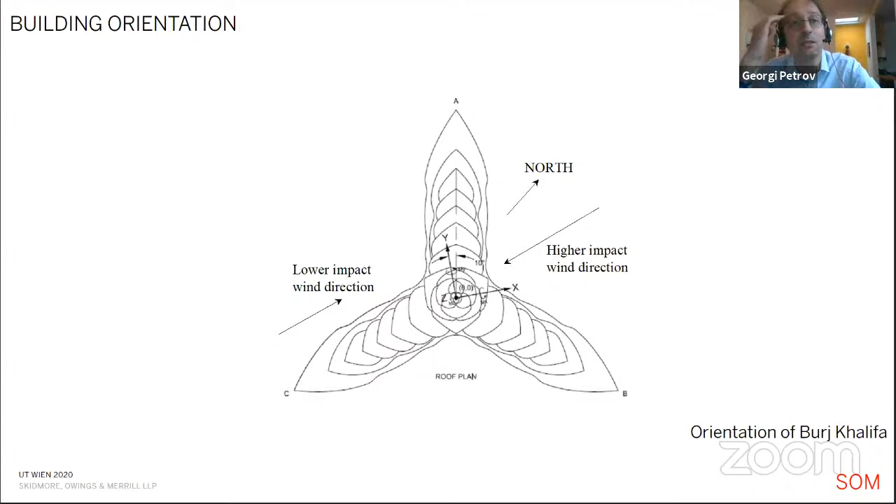So that was the first step. And then the second step is this effort in confusing the wind. How do you get the steps to be, and what's the best geometry of the steps to make it work? So you always start with some initial guess. So they started with an initial guess. And if you take this as 100%, as they were

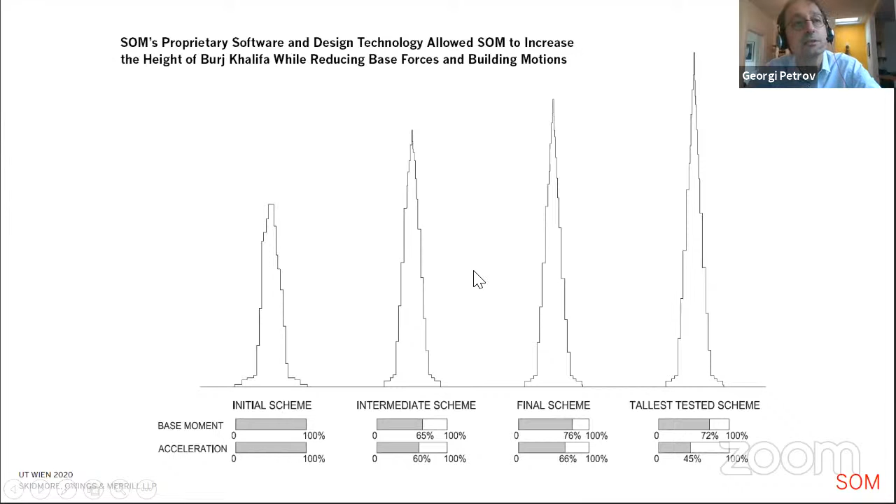advancing the design, you could take the same load and the same forces by changing the geometry. You could actually reduce the base moment and the accelerations. And so this final scheme has 3/4 of the forces in the original guess that was not optimized to respond to the wind.

And here are some of the models that were tested. There was actually a version of it that was taller than was actually built, that had even less load, even though it was taller. So this is this marriage, this idea of architecture and engineering working together to make a better, more efficient building that has less material in it. And here's the final thing.

So the final story I'll tell you is one about, I guess, the future, and the last challenge. In many places in the world, in New York especially, and in most European cities, we've kind of run out of space of where to build. And a lot of our cities have these big train infrastructures left over from the 19th century that are in the heart of the city, and they're where everybody comes in and commutes in public transportation.

And so these are sort of the last pieces of land left to build on, and they're very fortuitous, right? Because usually all the new subway lines meet there, so this is where all the people are. So if you can use the space and build above these train stations, it's really the last bit of where to build. And you guys have that in Vienna, right? Mitte train station used to be a train station that looked like this. And now you have a skyscraper and a mall and a bunch of other stuff on top of it. So you have an example of what I'm talking about right there, right next to you.

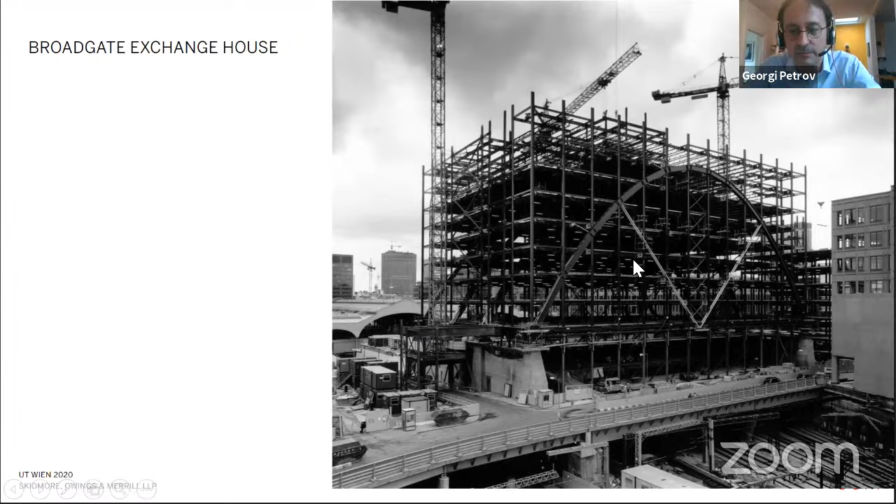And we've done it several times. This is in London. This is Exchange House, back in the 80s. And the building is entirely spanning over the train tracks of Liverpool Street Station. So now the station has a new building on top of it, but this is when it was constructed. So you have the train tracks running here, and the building is basically a big bridge spanning from one side to the other. Just across the street from that, we recently built Broadgate Tower, and it's the same idea.

Actually, SOM's London offices are on this floor right here, right where the braces come in. And here's the Exchange House in the back. You can see it, and then this is Broadgate. This one, because the condition of the train tracks is slightly different, the geometry is a little bit different. But again, the building is spanning over the train tracks on a piece of land that was unused.

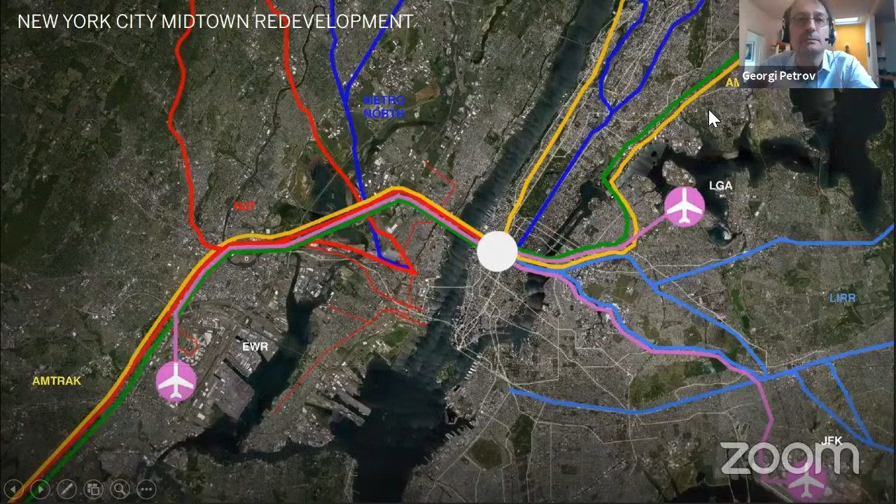But the final story is here in New York, and this is the west side of Manhattan. And these are two big developments that are still going up on the west side. And this is really a piece of big train infrastructure that started getting built in the late 1800s. So all the trains from Florida and Washington, D.C. come up through New Jersey, cross under the Hudson River, go under Manhattan and out the East River, and then up to Boston. And so this is the west side of Manhattan where the trains are.

So this is Madison Square Garden, a big arena that's built over the trains. And then these are the two developments that we've been working on. There's actually a big old post office that's now getting converted into a train station, and a big office level that we're involved in as well. So as SOM, we have a bit of each of these three big developments.

And this is what the trains look like below. So this is 2 city blocks, and this is the main platform where everybody gets on and off, here underneath Penn Station. And then the train tracks narrow down between 9th and 10th Avenue, which is one development. And then they kind of splay out into a big parking yard, which is called Hudson Yards. And then only 2 of them are actually the tunnel going out to New Jersey.

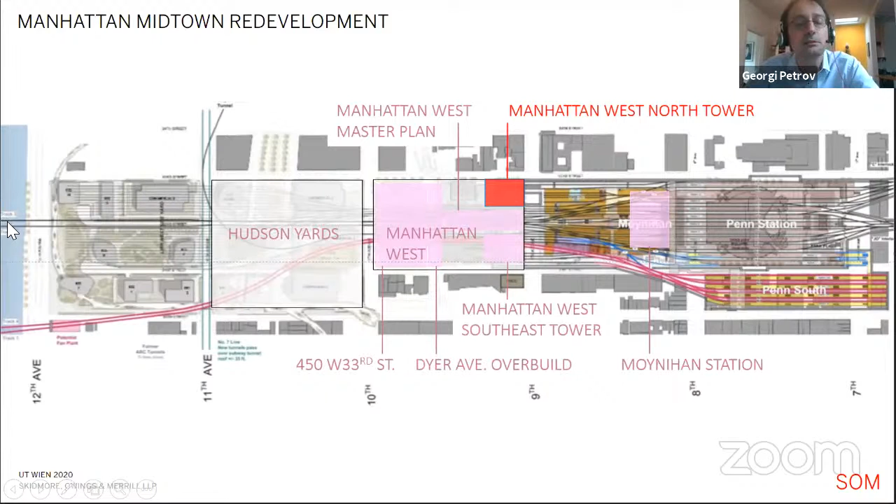There was only one building built in the 60s, but basically for 100 years, in the center of one of the most densely populated areas on the planet, there was this giant piece of infrastructure that was sitting there unused. There's a big hole in the ground. And we've done 3 tall buildings. So each of them is really governed by how they sit on the tracks. And each of them is around 300 meters tall.

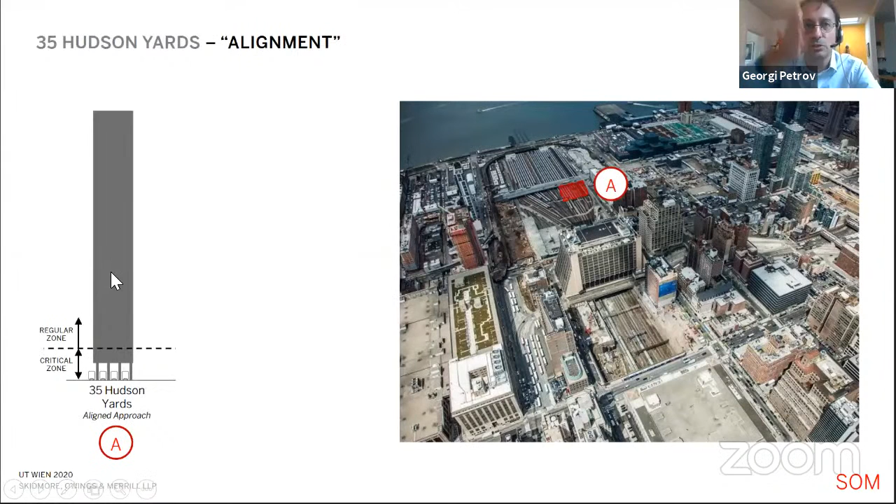So the one is 35 Hudson Yards, where we took an approach of aligning all of the structure and all of the architecture to match the cadence of the tracks below. Another one is 2 Manhattan West, where it's a big jumble of tracks down there, so here we had to put structure wherever we could. And then 1 Manhattan West is the one building that I've been most involved with for the last 6 years. Here we actually had an opportunity to avoid the tracks altogether, so the building steps in.

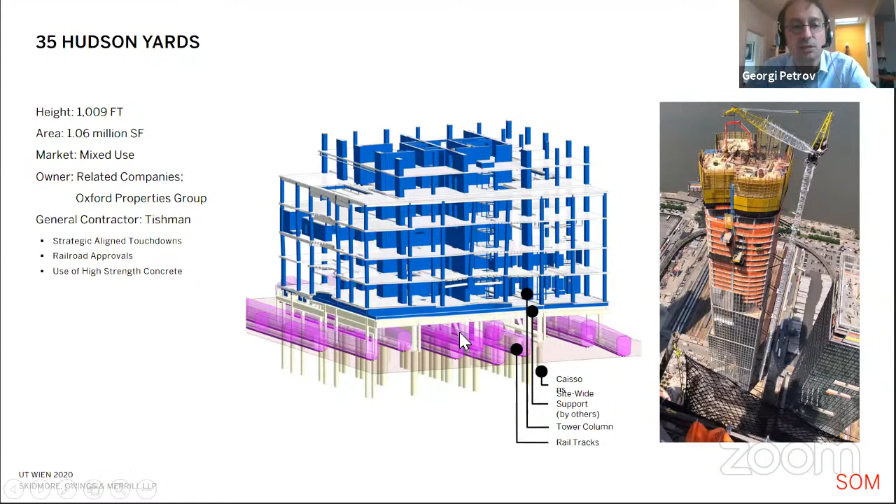So this is 35 Hudson Yards. Sorry. And you can see the building sits on the tracks below. This is mostly a residential and a hotel building. So this is the parking yard, and this is where our structure sits. There's a bunch of other buildings here by other architects and engineers, and they all have a little bit of solid ground to come down on. This one is entirely over train tracks.

And so what we did is every 3 train lines, there's a little bit of extra space. That's where we're putting our structure. And everything is lined up with these train tracks. So here's the groups of 3 with the structural elements in between. And that really governed all of the architecture and all of the structure. Here's the first columns coming in. You can see the trains below.

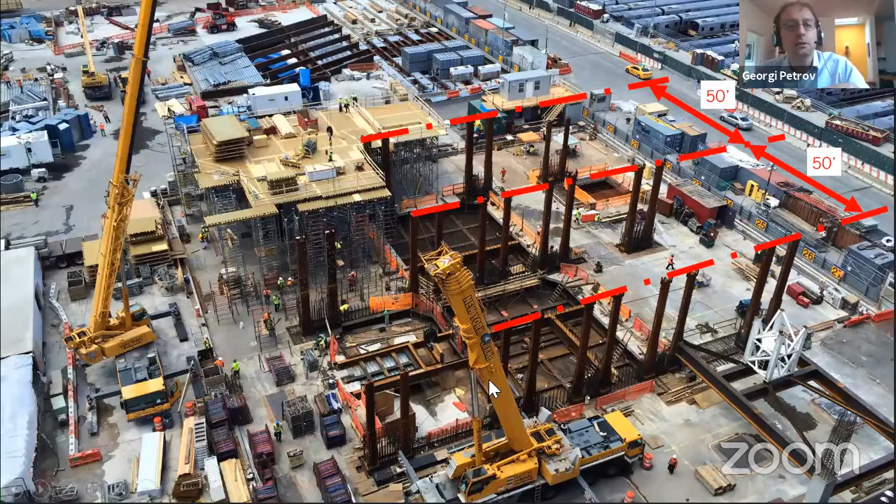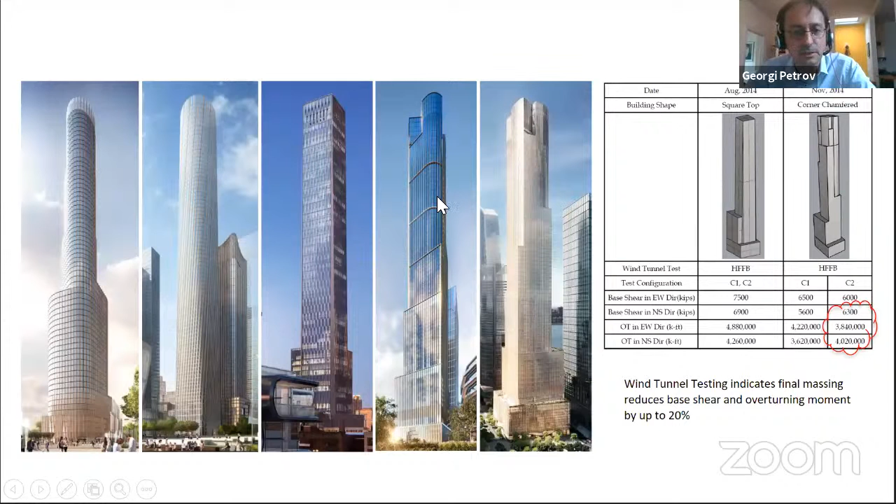And we had to start with steel in order to make it fit in between. We had 2 feet, which is a little bit more than half a meter, to go in between the trains. Because it's a residential building, it then transitions into concrete above, and you can see as it steps in, everything has to be perfectly aligned with these dimensions governed by the train tracks. Again, we did a lot of wind tunnel studies to shape the building, and above ground there were a lot of different versions of it until we settled on this one.

And this is the trick. In one direction, you could get bracing. In the other direction, this 300-meter tall tower just sits on a single-story moment frame. So the structural columns all line up, and then there's some gravity columns on the perimeter. And here's the final building. It just opened last year, right before the pandemic. It's this 300-meter tall tower with trains going through it fully.

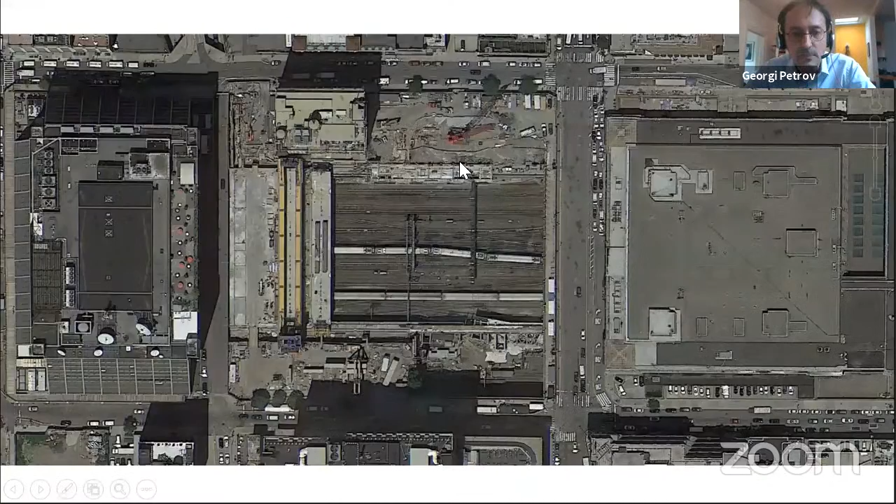1 Manhattan West is an office building. It's just down the street, and here the tracks narrow down. So our building is right above here in this area. And the first thing that was done, by another engineering group, is cover the train tracks with a big platform that would eventually become a plaza between the 2 buildings. And this is when the train tracks got covered up and we're starting to dig our hole for our building.

So on this building, we had the opportunity to take the columns that would be over the train tracks and bring them in. And the last piece of structure here is literally several centimeters away from the crash wall of the last track.

But this would have created a very asymmetrical building, right? And it would have had a lot of torsion here. So what we did is brought it in on the north side as well. And this is kind of like the essence of the structural system.

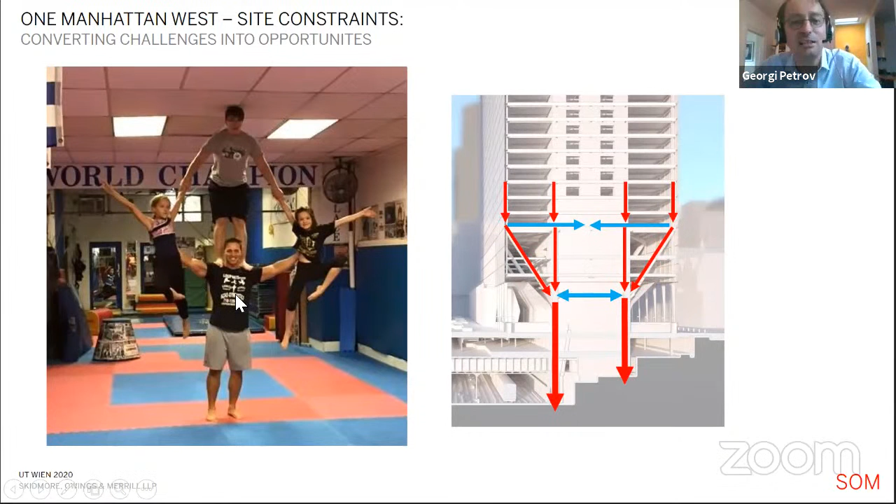This was a gym that my kids used to go to here in Astoria, and it's got the core and the main thing going straight down, and all the perimeter comes down through these arms stretched out to the ground. And it's a very narrow building.

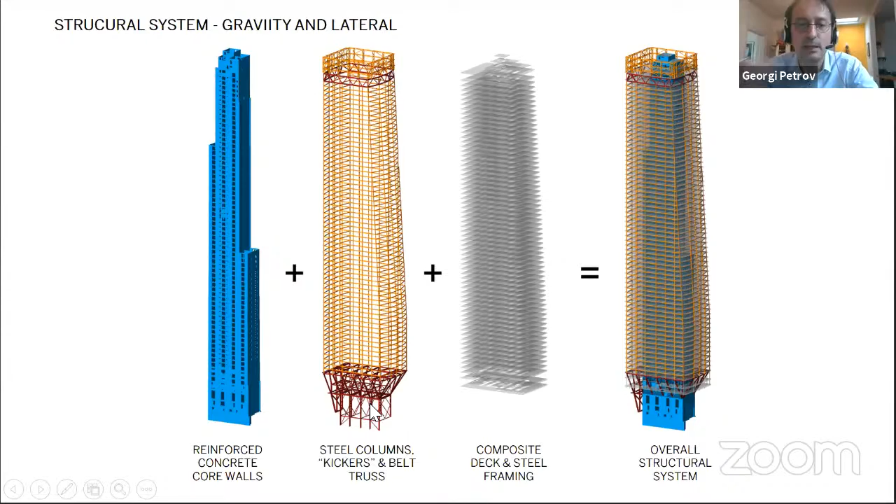And then we have a concrete core and a steel perimeter, and then it all transitions down here at the bottom. And that's part of the goal: it's trying to resolve all of this strange geometry and all this gymnastics down at the ground level where you could build it easily. And then once you get to a certain height, it's a very conventional, simple building that goes up really easily.

Architecturally, we have 3 of the sides go straight up, and then the east side kind of slopes out and slopes back in. And we actually use this to our advantage. Because the east side goes up and slopes back in, it actually has the least load on it, right? There's a lot more load going down the west side than the east side.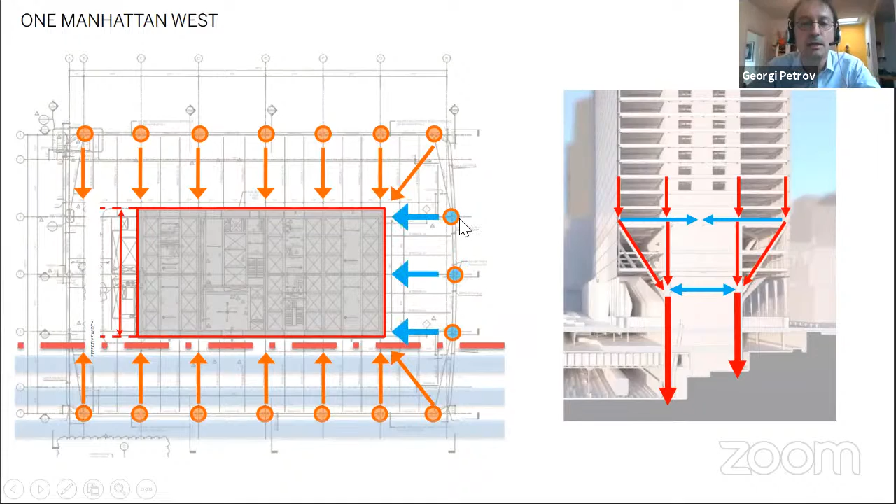And so as I said, all of the columns on the south had to come in because of the trains, and we brought the columns on the north in order to balance the south. But on the east, we didn't really have to do it. We did have solid rock to build on here, but we brought them in anyway in order to achieve this pretty dramatic lobby down below. So the south comes in, the north comes in, and by bringing in these relatively lightly loaded columns, we can have this 70-story tower with about 12 meters of absolutely clear column-free lobby down on ground level.

This is an early rendering of it. Again, in order to make all this happen, we had to pay a lot of attention to how all the pieces are connected so that we can optimize them and make them as constructible as possible. And there's a lot of trickery in how to get this big element down to fit inside the core and to minimize the spacing between the elevators. So again, the elevator has a big influence on the structure and the architecture.

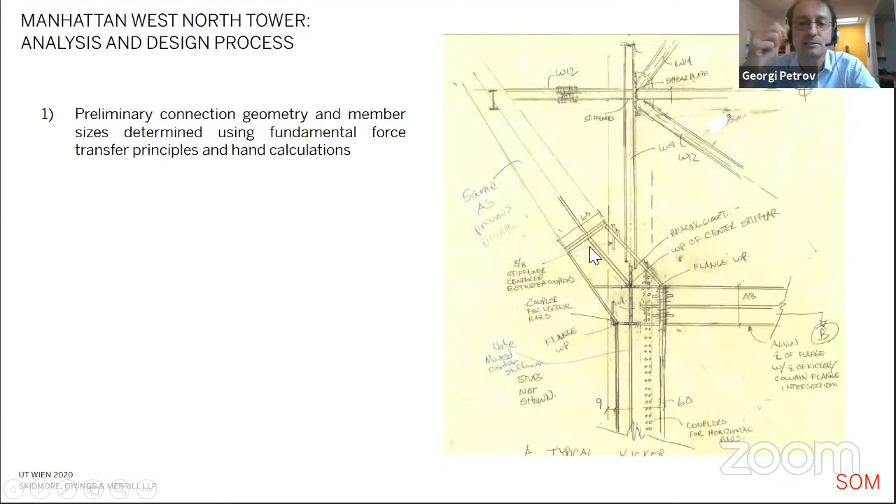And we always start with, again, this theme of we have a lot of these tools, but we always start with sketches and draw it all out by hand. Then we model it in 3D. And then this is the forces going through the structural elements with all the loads from the building, all the different pieces. So this is the 3D model. This is our documentation and drawing of it. And then this is one of the pieces on site.

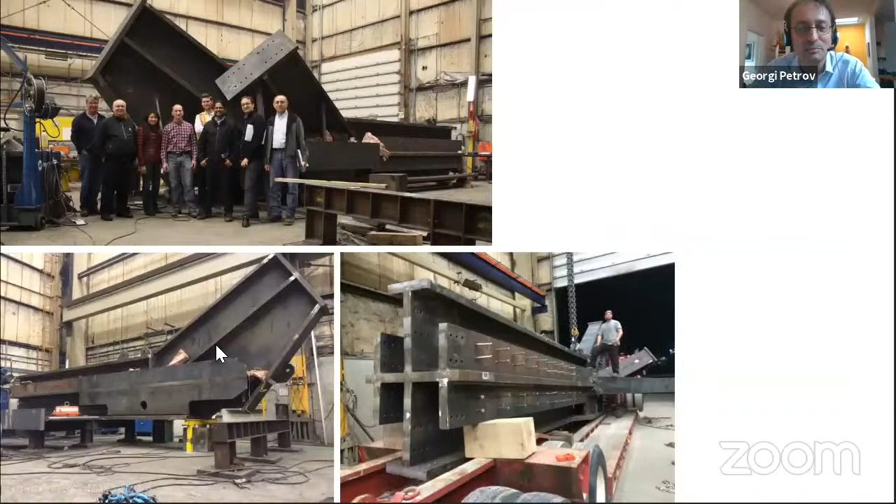And this particular piece, where 4 of them come in, was really complicated. We looked at it for 2 years on the screen, modeling it on the computer, and finally we got to go see it getting built up in Canada. It was pretty exciting. And then we started seeing it and goofing around with the model. It could look like a spaceship or an old warship and things like that.

And then I finally got to see it arrive in the streets in Manhattan. It got brought in on this big giant truck. This is a bus compared to this piece of steel. So I actually got together with a colleague and my dad, and we drove in the car and chased it down the street as it was passing through the city. It was pretty crazy to see this giant piece of steel just driving through the city. And here's a video of it getting put up.

Sorry if it's too loud. So this is sped up a little bit. You can see the scale of it. This is about 90 tons of steel just kind of hanging out and coming in. And then, again, the scale of some of these elements as they're getting put up.

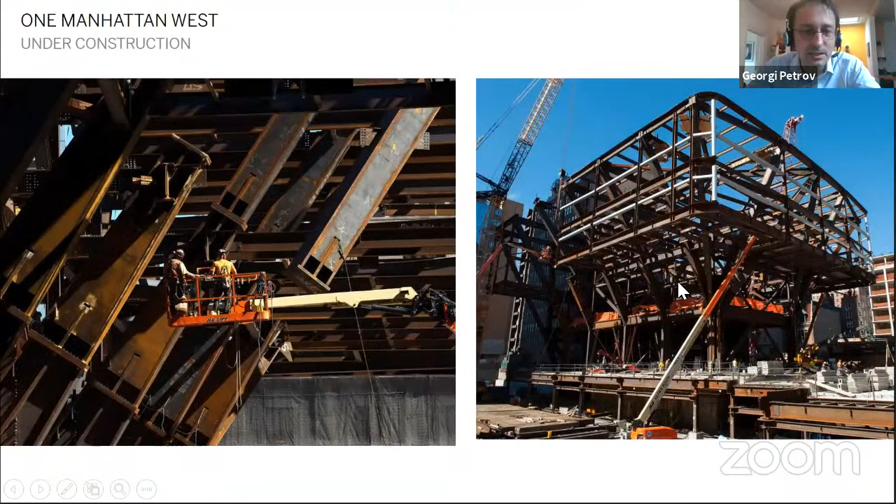We also had the concrete core go through, so we model every single piece of rebar in 3 dimensions to make sure that it all fits and resolves all sorts of problems before they get on site. So here's our model. And here's all the rebar getting put in on site around this complicated steel. You have to really play around with it. How do you fit it all in together in 3 dimensions?

The trains are running 24 hours underneath this truss here. So the last piece of steel is right next to the last train track. And then the core coming up. And then the rest of the tower. Here it is getting constructed in the city. Here's the Empire State Building.

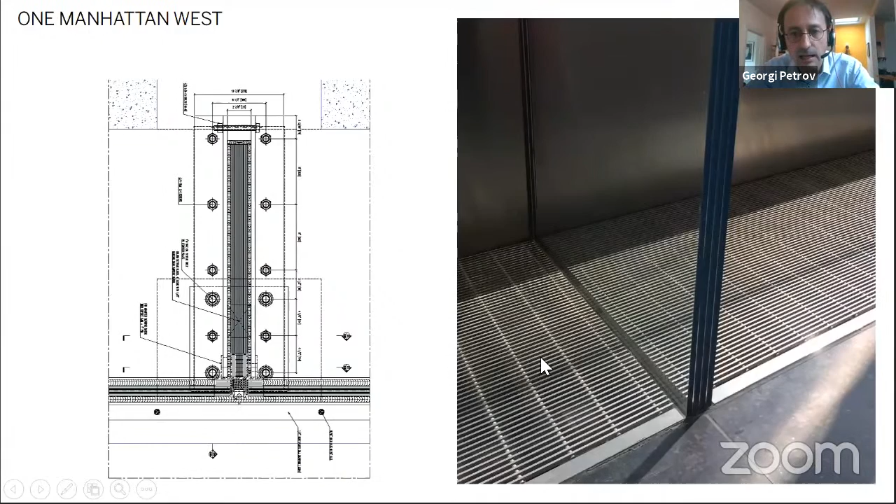In order to take full advantage of this big column-free perimeter, we spend a lot of time engineering the glass facade. So it's all glass fins, and they're made out of 5 pieces of glass. It's probably, I don't know if in the world, but definitely in North America, the longest fin that doesn't have a splice. You've seen a lot of these glass facades; trying to splice a piece of glass is pretty clunky looking. You need a lot of steel in order to spread the stress.

And so these are 12-meter long pieces. I think it was the longest we could get uninterrupted. The face glass has 3 joints, but that's pretty small. That's just a very thin silicone joint. So it's super transparent. Here's the corner bit of it. And here it is, the 70 stories of office space coming down to a completely glass perimeter.

This is a night shot. One of my colleagues has a friend in an apartment, so we went and got some nice photos of it from above. And one theme that we have is that we model a lot of things, and here's the 3D model, here's the steel, and it's almost exactly the same. And then the rendering, what we promised the client, and then what we delivered at the end.

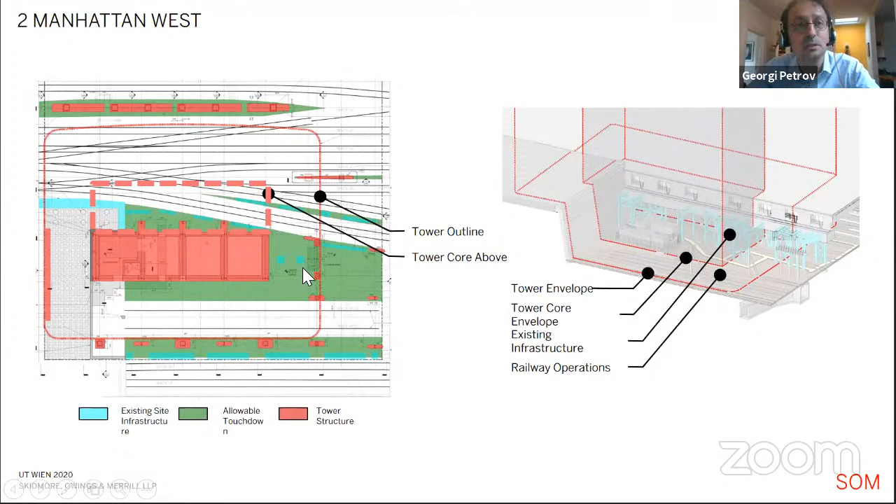And finally, I think I have a little bit more time. We're now working on the cousin of this tower, which is 2 Manhattan West on the other side. And this is the one where it's a really big mess of trains below it. So this is the outline of the tower above. And green is the only place where we could put structure. So you can see some of it is actually outside of the tower.

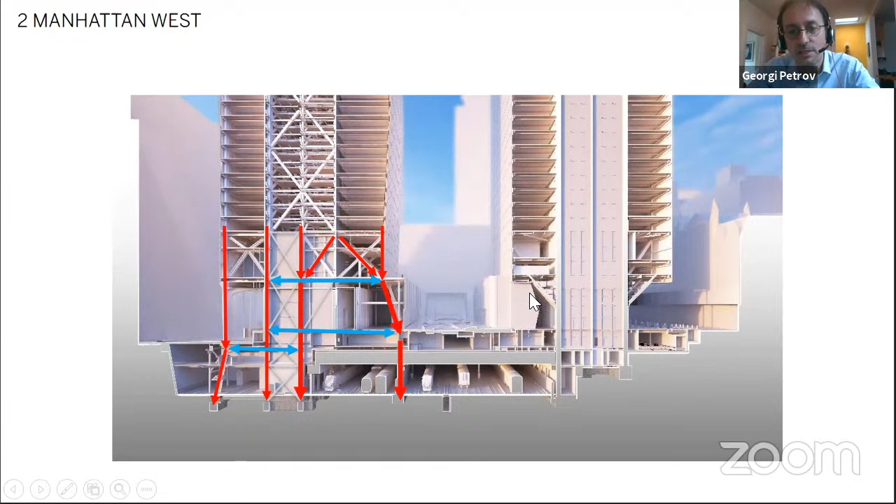And this is what was existing, all the train infrastructure that we had to thread a needle through in order to build this building. So here, it's not as neat as the other one, but basically we had to transfer each column however best we could. And here on the north side, the perimeter is undercut. On the south side, it's kind of the opposite. The core is undercut. But we had the same strategy of doing all the complicated gymnastics down at ground where it could be easily built, and then a pretty simple building above.

And for the facade here, the client wanted to sort of match the other one, but the way the site sloped, you actually get 15 or 16 meters high, which was too big for a single piece of glass. So on this one, we're doing a cable net. And in order to minimize the impact of it, we didn't want any of these big spider connections that were popular 10, 15 years ago. So we're doing a very, very small connection that's all going to be tied. So instead of grabbing it like the big spider clips, we're having these little shelves that are hidden inside the cable.

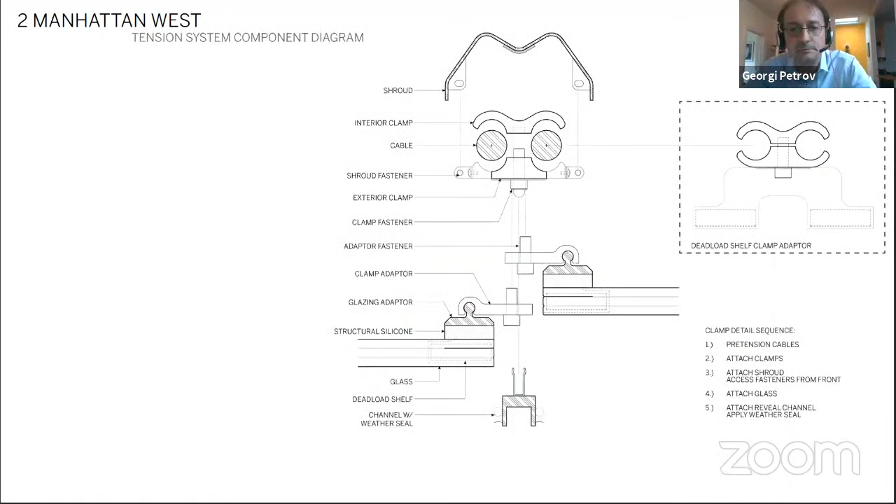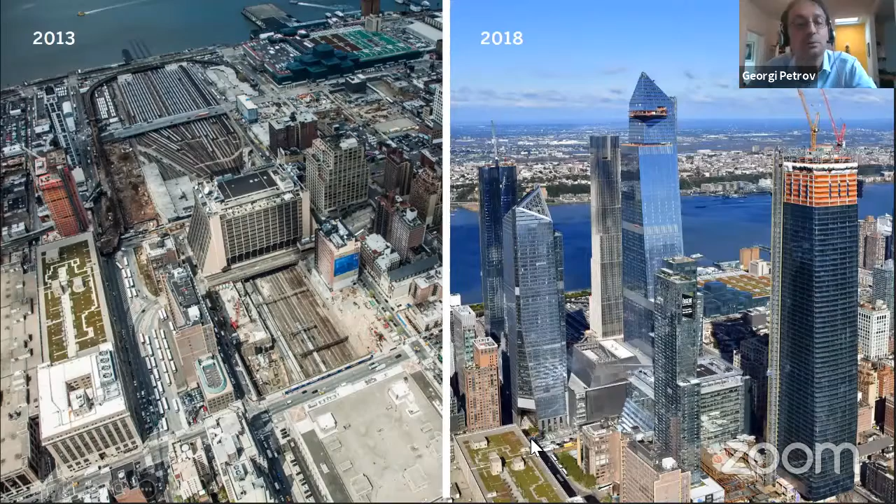And so in closing, this was 6 years ago what the site looked like, and this is 2 years ago. There have been a couple more towers completed since then. But beyond economics, trying to build in places that were unbuildable before is really the idea, to be as efficient as possible and to build as best as possible in order to live in a world of limited resources.

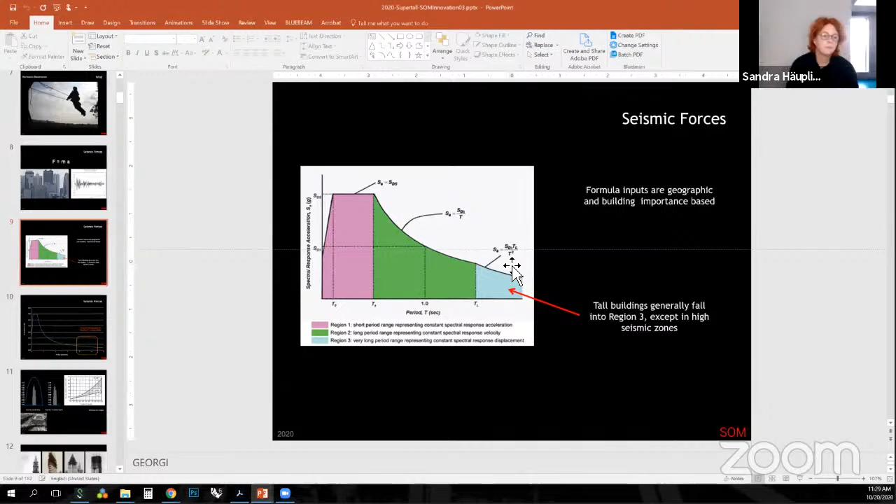And this is a graph of the forces in a seismic event, and it really depends on your building, and then this is the percentage of the acceleration of gravity. So the percentage of the gravity force that you have to design for is a lateral force. And if you have a 1 to 10-story building, they're usually here, about 1 to 2 seconds of vibration of the building.

Most tall buildings have a fundamental period that is much longer, usually like 6 to 10 seconds. And because their frequency is very different than the earthquakes, usually the forces in a tall building are much, much lower than what you would see in a short building. So in an earthquake event, the safest place to be is in a super tall tower, because really the earthquake kind of goes by it, and it doesn't really excite it, both because of its mass and because of its period.

That's why I said that tall buildings are almost never governed by seismic forces. It's only very peculiar places like Mexico City, which is sitting in a lake bed and has really crappy soil, and it's in the middle of the continent, so the wind loads are low, and there everything is governed by seismic forces. Almost everywhere else in the world, for a tall building, it's 100% governed by the wind. So yeah.

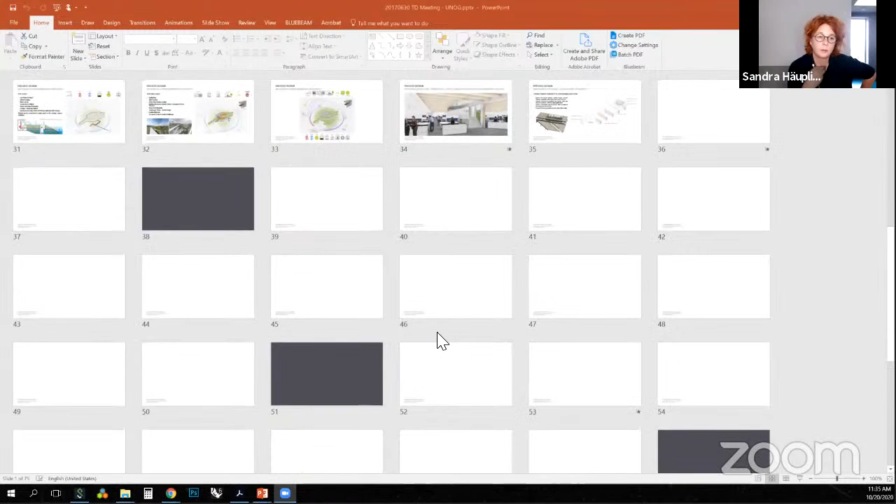Georgi, can I ask you a question in between? Yeah. You have talked a lot about the process and the change of the process towards optimization of building structures and historical developments and where you are now. Where do you think we will be in the next 10 years in terms of building optimization? And I would like to know how you think the role of the architect or engineer will change.

Oof, that's a very philosophical question. I have several things I think are going on. A lot of people are talking about 3D printing, which we're starting to experiment with on a small scale. I don't think we're anywhere near 3D printing at the scale of the buildings I'm talking about, a skyscraper and things like that. For a single story building, there's some pretty successful things going on already.

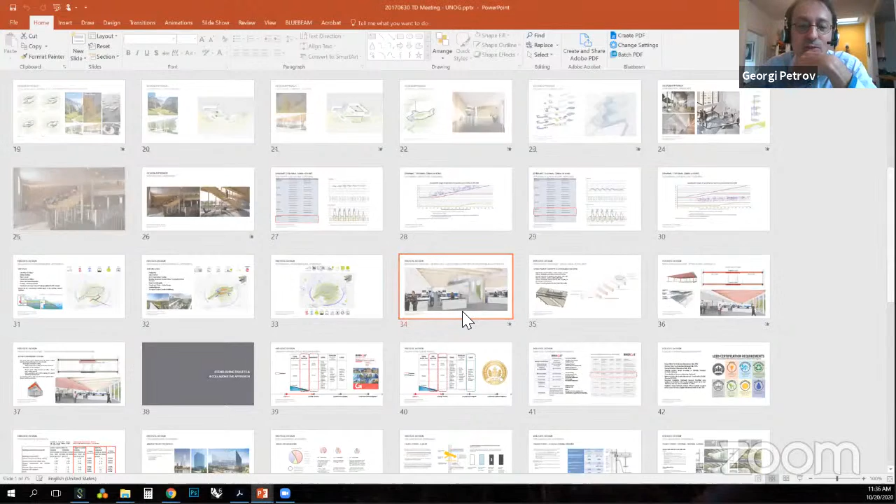For now, for these big projects, concrete and steel are really the way to go. And as we're talking about, we're trying to introduce wood wherever possible. And it's catching on, and the codes are catching up as well.

The other long-term development that we've talked about is artificial intelligence and using that for design, and we're already seeing it on the construction side. For example, in detailing, designing the steel connections for all these towers. So One Manhattan West, the tower has hundreds of thousands of connections, and the number of bolts and things like that. And a lot of these are very prescriptive. So they used to be designed one at a time,

but now we're seeing several companies that have popped up that basically can design all the connections in a couple of hours. It would take months for an engineer to do. That's for a very prescriptive thing, and so we're looking into that actively, actually, and using machine learning.

Another project we had: a part of AI and machine learning that's pretty advanced is image recognition. So using surveys of the site to do construction administration and to monitor what goes on the site. We had a project with timber, a new library that we built just recently, and it had some cracks in the timber. And so we used machine learning to help find them all from pictures people just took on site.